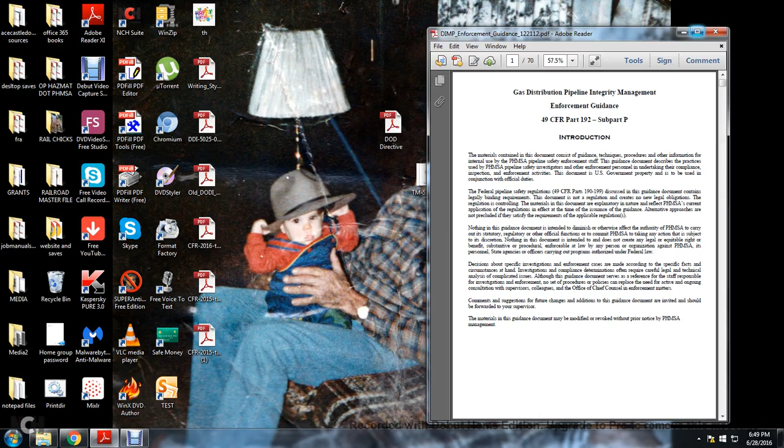Alright, hi. Continuing with our pipeline enforcement videos, I have the DIMP enforcement guidelines, the Gas Distribution and Pipeline Integrity Management Enforcement Guide, Title 49 CFR Part 192, Subpart P.

Introduction. The materials contained within this document consist of guidance, techniques, procedures, and other information for internal use of the Pipeline Hazardous Material Safety Administration pipeline safety enforcement staff. The guideline documentation describes practices used by Pipeline Hazardous Material Safety Administration pipeline safety investigators and other enforcement personnel undertaken with compliance, inspection, and enforcement activities.

This document is U.S. government property and is to be used in conjunction with the official duties of the Federal Pipeline Safety Regulations. See Title 49 CFR Part 190 through 199; this guidance documentation does not contain legally binding requirements. The document is not a regulation and creates no legal obligations. The regulation is controlling. The material in the document is explanatory in nature and reflects the Pipeline Hazardous Material Safety Administration's current application of regulations in effect at the time of issuance of the guidance.

Alternative approaches are not precluded by safety requirements of applicable regulation. Nothing in the guidance of this document is intended to diminish or otherwise affect the authority of the Pipeline Hazardous Material Safety Administration to carry out its statutory, regulatory, or other official functions, or to commit the Pipeline Hazardous Material Safety Administration to taking any action that subjects its discretion.

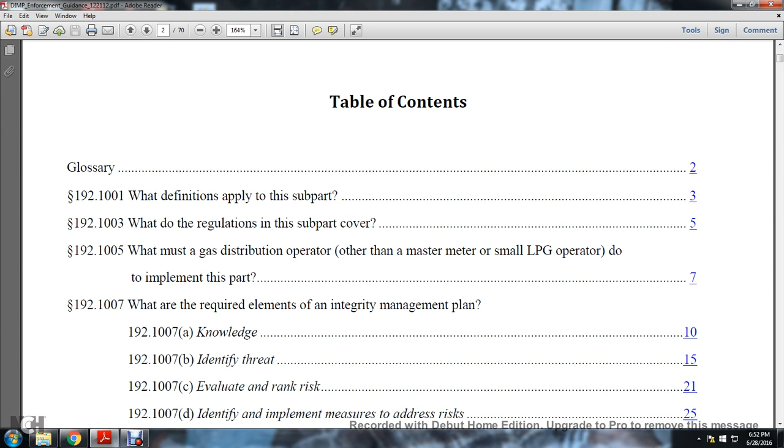Table of Contents: 192.1001, what are the definitions? Subpart 192.1003, what is the regulation? Subcovered. What is 192.1005? What must a gas distribution operator, other than a master meter or small LPG operator, do to implement the part?

What is 192.1007? What are the required elements of the integrity management plan? A, knowledge. B, identify threats. C, evaluate and rank risk. D, identify and implement measures to address risk. E, measure performance, monitor results, and evaluate effectiveness. F, periodic evaluation and improvement. G, report results.

192.1009, 191.12. What must an operator report when a mechanical fitting fails? What is 192.1011? What records must an operator keep? 192.1013. When may an operator deviate from required periodic inspections under this part?

192.1015, what must a master meter or small liquefied petroleum gas (LPG) operator do to implement the subpart? A, general. 192.1015B, what are the required elements of the integrity management plan? Knowledge, identifying and ranking risk, identifying and implementing measures to mitigate risk, measuring performance, monitoring results, evaluating effectiveness, periodic evaluation and improvement. 192.1015C, what are the required elements of the integrity management plan? C, records.

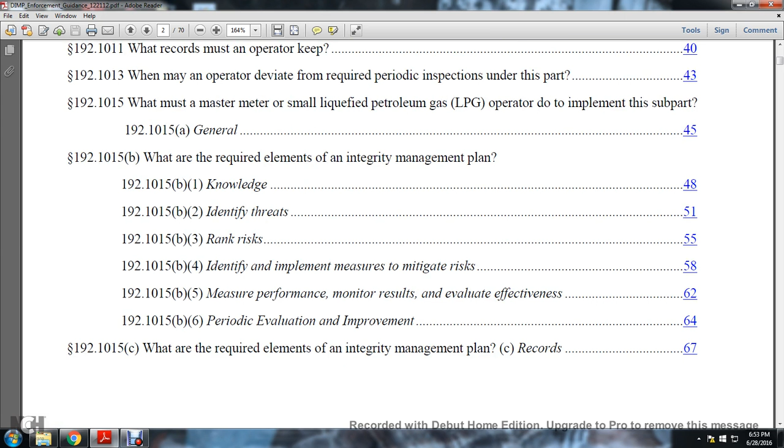Alright, for the complete glossary of terms, please refer to the following link: phmsa.gov/static files/phmsa/pipeline/tq glossary HTML.

Alright, enforcement guidance, distribution integrity management, Part 192, revision date December 21st, 2012. Distribution integrity management, Part 192, December 21st, 2012. Code section 192.1001.

What definitions apply to the subpart? The existing code's language: the following definitions apply to the subpart.

Excavation damage: any of the impact or results needed for the repair or replacement of underground facilities due to weakening, partial, or complete destruction of the facility, including but not limited to protective coating, lateral support, cathodic protection, and or housing of the line device facility.

Hazardous leaks. The following definitions apply. Hazardous leak means a leak representing an existing or probable hazard to person or property, and requires immediate repair or continuous action until the conditions are no longer hazardous.

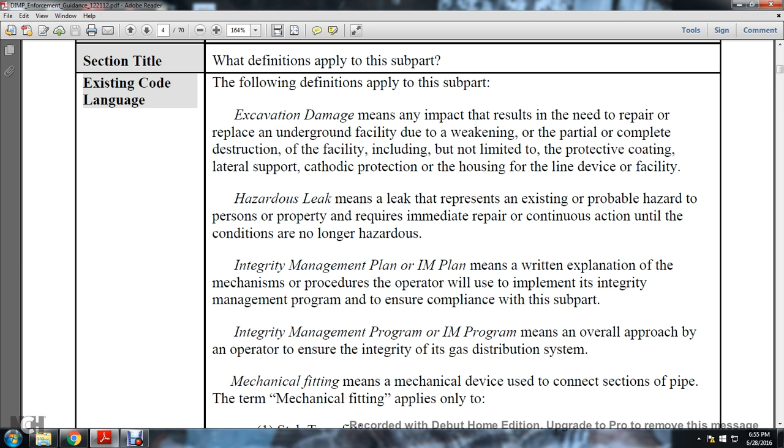The definition of integrity management plan, or the IM plan, means a written explanation of the mechanisms and procedures that the operator will use to implement the integrity management program to ensure compliance with the subpart. Also, integrity management program (IM program, instead of plan) means an overall approach by the operator to ensure the integrity of its gas distribution system.

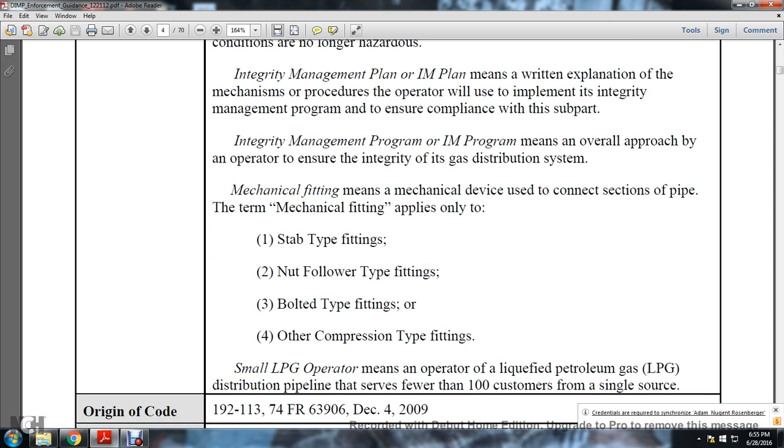The following definition of mechanical fitting means a mechanical device used to connect sections of pipe. This mechanical fitting definition applies only to stab-type fittings, nut follower-type fittings, bolted-type fittings, and other compression-type fittings.

A small LPG operator means an operator of a liquefied petroleum gas distribution pipeline that serves fewer than 100 customers from a single source.

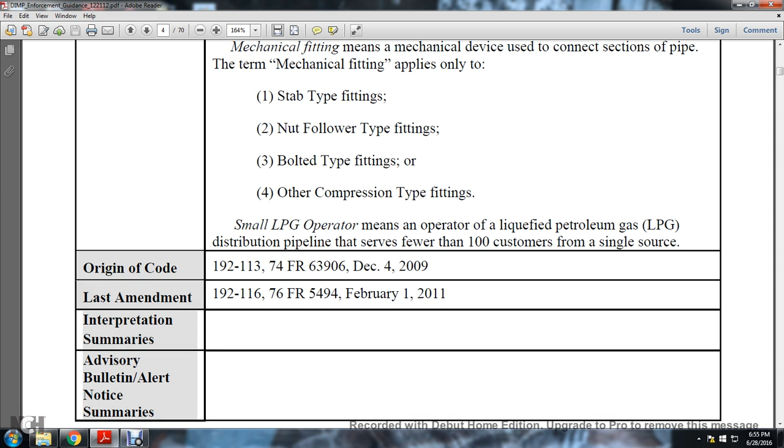The origin of the codes: 192-113, 74 Federal Register 63906, December 4th, 2009. The last amendment was 192-116, 76 FR 5494, February 1st, 2011.

Interpretation summaries, advisory bulletins, alert notice summaries without other materials and source, without guidance and information.

A line does not have the experience of a leak or release. The line does not have the experience of a leak or release to be considered to have been damage or excavation damage. An operator need not classify leaks as hazardous or non-hazardous provided with the leaks.

Repair of all leaks were found to qualify for the exclusion. An operator must treat all leaks as if they were hazardous, providing immediate repair and continuous action until the leak is repaired. Examples of a probable violation.

1. The operator does not have a comprehensive list of definitions. 2. The operator does not include the definitions in the distribution integrity management plan, or the DIMP plan, in other plans.

The operator's definitions are not consistent with Part 192. Examples of evidence include a copy of the written distribution integrity management plan or applicable portions that depict an omissions deficiency in the plan, and operator records. Other special notations: there were none.

Enforcement guidance, Distribution Integrity Management Plan, Part 192, revision date December 21st, 2012, code section 192.1003. What does the regulation subpart cover?

The existing code language: generally, the subpart prescribes minimum requirements for the integrity management program for any gas distribution pipeline covered under this part, including liquefied petroleum gas systems.

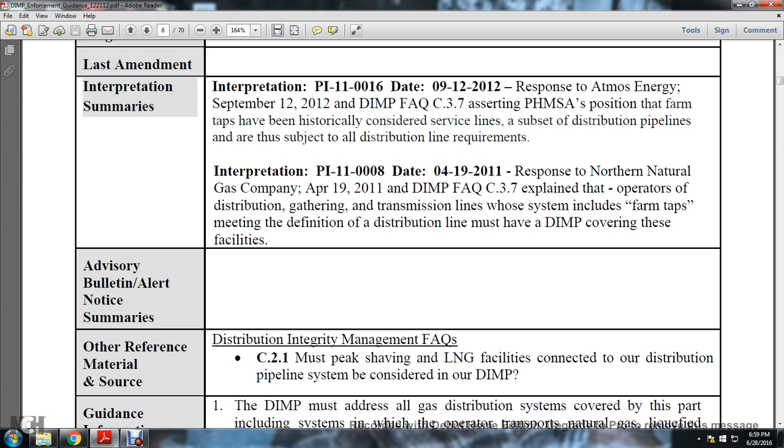FAQ C.3.7 explained that operators of distribution, gathering, or transmission lines whose system includes farm taps meeting the definition of distribution lines must have a distribution integrity management program covering these facilities.

The advisory bulletin and alert notice summaries are not available. Other reference material sources: Distribution Integrity Management FAQ.

C2.1: Must an LNG facility connected with the distribution pipeline be considered a part of the distribution integrity management program or plan?

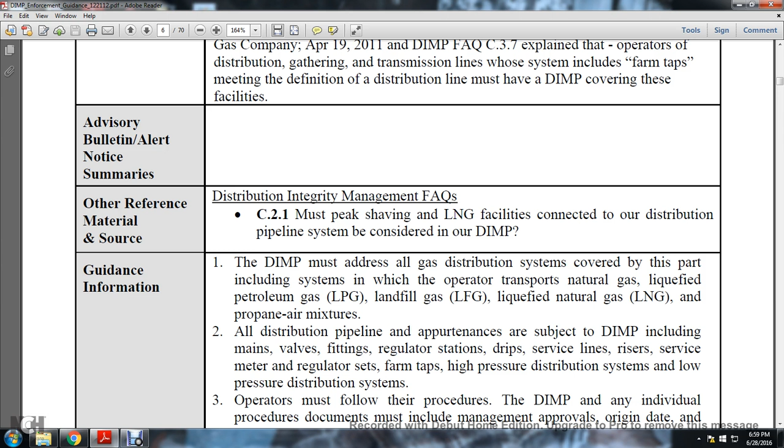The guidance states the distribution integrity program must address all distribution systems covered in this part, including systems in which the operator transports natural gas, liquefied petroleum gas, landfill gas, or liquefied natural gas. LPG is liquefied petroleum gas, LFG is landfill gas, LNG is liquefied natural gas, and also a propane-air mixture.

2. All distribution pipelines or facilities are subject to the distribution integrity management program, including main valves, fittings, regulator stations, drips, service lines, risers, services, meters, regulator sets, farm taps, high-pressure distribution systems, and low-pressure distribution systems.

3. The operator must follow the procedures of the Distribution Integrity Management Program. Any individual procedure document must include management approval, origin date, and effective date of the last revision. For additional information, see the guidance of Sections 192-1005.

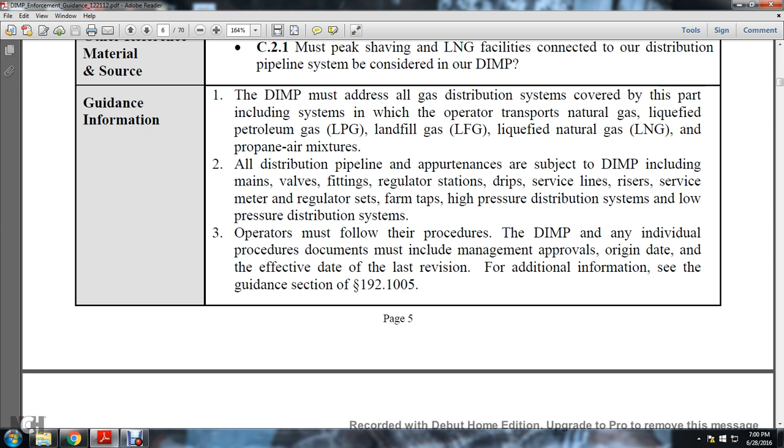4. Master meter and small liquefied petroleum gas operators are treated differently in the Distribution Integrity Management Program rule. For larger operators, as well as master meter and small liquefied petroleum gas operators, the integrity management program must include an appropriate set of mechanisms and procedures developed to implement each program element.

The operator may employ a written explanation of the process or mechanism used to develop and implement a required element in lieu of a specific written procedure. The integrity management program for these pipelines should reflect the specifics of the types of pipeline. The distribution integrity management program could be concise but sufficient for operator personnel to understand and implement the program on a consistent basis.

Examples of probable violation: the operator's distribution integrity management does not include all operator distribution pipeline facilities. The operator does not address liquefied petroleum gas or other types of transported material when applicable.

The necessary regulated pipeline systems are not covered by the Distribution Integrity Management Program. The Distribution Integrity Management Program does not include all pipeline facilities. An example of evidence is a copy of the written Distribution Integrity Management Program application showing the omission or deficiency in the Distribution Integrity Management Program, including copies of applicable pages showing the operator has not clearly stated otherwise.

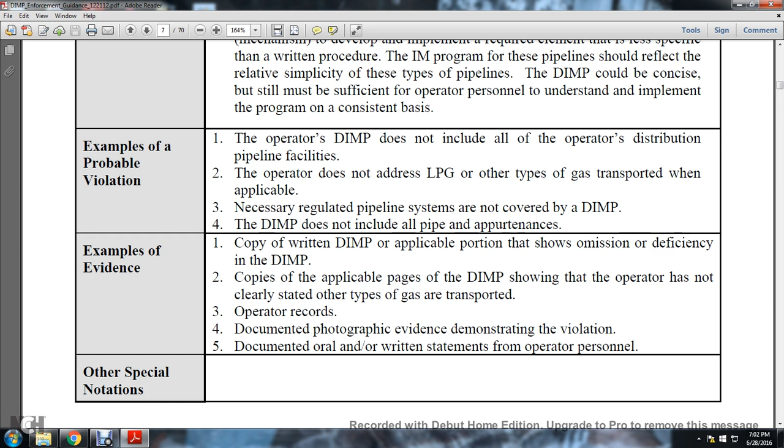Types of gas are transported. Operator records, documented photographic evidence demonstrating the violation, documentation, and oral or written statements of the operator personnel. Other special notations are not foreseen. Enforcement guidelines continuing.

Last amended: not foreseen. Interpretation summaries: not foreseen. Advisory bulletins and alerts: not foreseen. Other reference materials addressing the Distribution Integrity Management Program include the final rule preamble in the Federal Register Volume 74, Number 232, Friday December 4th, 2009, the rules and regulations, the comment topic 4, implementation time on page 63909, and comment topic 11 on required documentation, page 63915, Distribution Integrity Management Program, Pipeline and Hazardous Materials Safety Administration frequently asked questions.

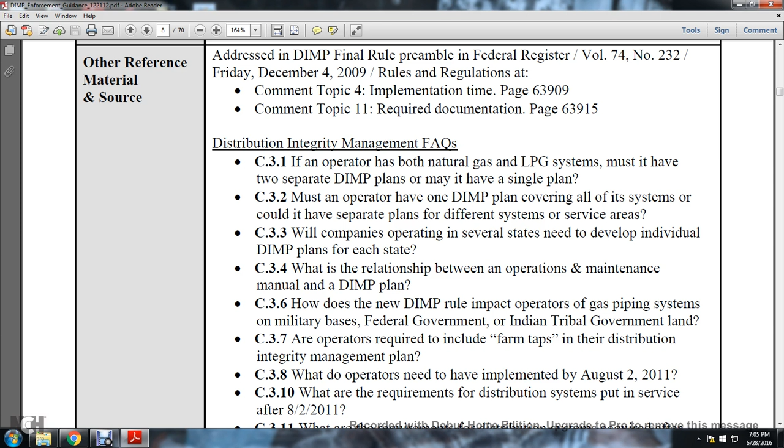C38: What do operators need to implement by August 2nd, 2011? C310: What are the other requirements of the distribution system put in service after August 2nd, 2011? C311: What are the requirements of the distribution system required by December 2nd, 2011?

explanation of mechanisms and procedures that the operator will use to implement the Integrity Management Program to ensure compliance with the subpart. An operator must have a written Distribution Integrity Management Program, Distribution Integrity Management Plan, the DIMP, containing and referencing procedures for development and implementation, each required in an element under statute 192-1007.

The procedure must have adequate detail to clearly describe the manner in which each requirement will be met. The procedure must be documented so the inspector can make a reasonable determination as to the accuracy and thoroughness of the procedure. The procedure needs to be provided with a description of who, what, when, where, why, and how the operator will perform the elements of the distribution integrity management plan, and can be concise yet sufficient for the operator personnel to understand and implement the program on a consistent basis.

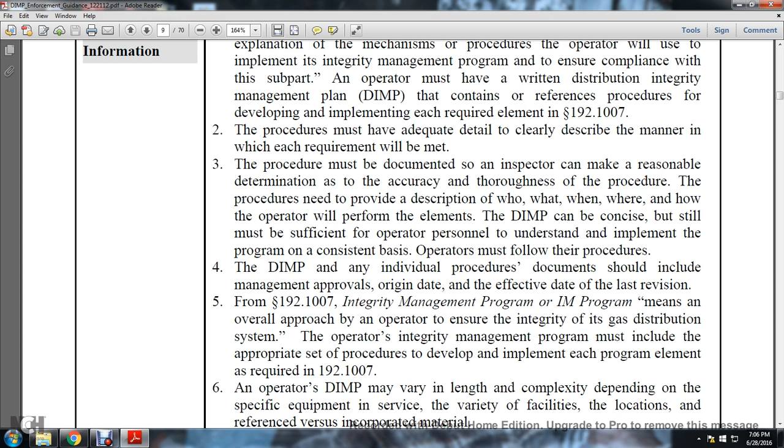Operators must follow this procedure. The distribution integrity management program and individual procedure documents should include management approvals, origin date, and the effective date of the last revision.

From 192-1007, the Integrity Management Program or IM Program means an overall approach by the operator to ensure the integrity of the gas distribution system. The operator's integrity management program must include the appropriate set of procedures developed for the implementation of each program element as required in statute 192-1007. An operator's distribution integrity management plan may vary in length and complexity depending on the specific equipment in service, variety of facilities, location, referenced versus incorporated material.

The structure of the Distribution Integrity Management Program is not prescribed; it may consist of a single comprehensive Distribution Integrity Management Program, multiple cross-referenced volumes, and reference documents. The Distribution Integrity Management Plan can be made available to personnel in hard copy. Computer-based documents must be accessible at the location where required Distribution Integrity Management Program activities are conducted. The operator must provide a means to access the procedures in the event of computer failure.

Purchased or off-the-shelf plans: Procedures must be fully customized by the operator to cover the specific, consistent operating requirements. The procedure must have adequate detail to clearly describe the manner in which each requirement will be met.

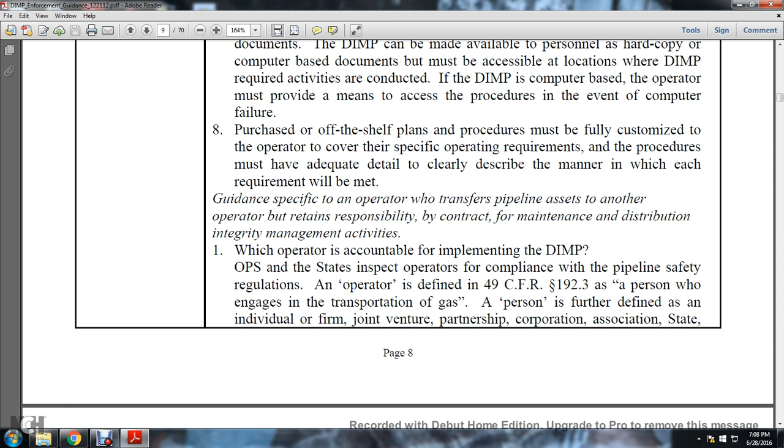Guidance specific to the operator covers transferring pipeline assets to another operator, but the original operator retains responsibility, by contract, for maintenance, distribution, and integrity management activities.

Which operator is accountable for implementing the Distribution Integrity Management Plan? The operator's compliance with pipeline safety is overseen by state inspectors. The operator is defined in Title 49 CFR 192.3 as a person who engages in the transportation of gas.

A person is further defined as an individual, firm, joint venture, partnership, corporation, association, state, municipality, cooperative association, joint stock association, including any trustee, receiver, assignee, or personal representative thereof, and any operator retaining responsibility for operation and maintenance, including distribution integrity management program activities.

The operator is responsible for complying with the pipeline safety regulations.

Examples of probable violations: the operator does not have the distribution integrity management program written and implemented by August 2nd, 2011; the program does not contain the necessary procedures to demonstrate it was written and implemented; a new system was put into operation service without a written distribution integrity management program.

Another probable violation is an operator who acquired an existing system and did not continue operation under the existing distribution integrity management program, failing to incorporate the acquired assets into that program.

Examples of evidence are copies of the applicable pages of the Distribution Integrity Management Program showing the operator has not clearly stated that the program was written and implemented by August 2nd, 2011, along with documented oral or written statements from operator personnel.

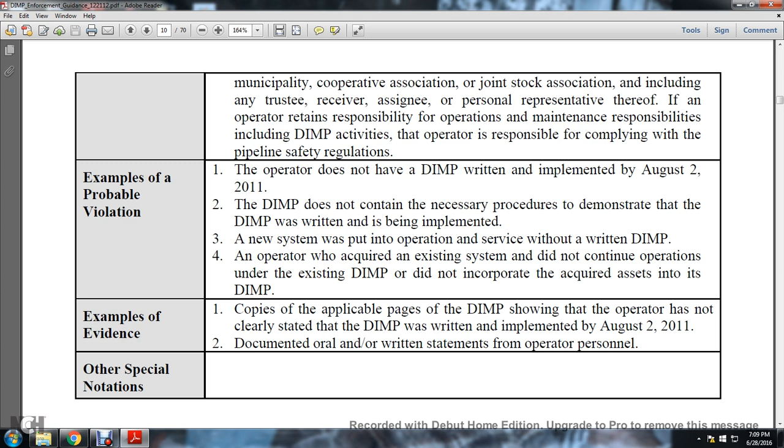Other special notations are not foreseeable.

Enforcement guidance: Distribution Integrity Management, December 21st, 2012, revision date, code section 192.1007(a), under the section titled 'What are the required elements of an integrity management plan?'

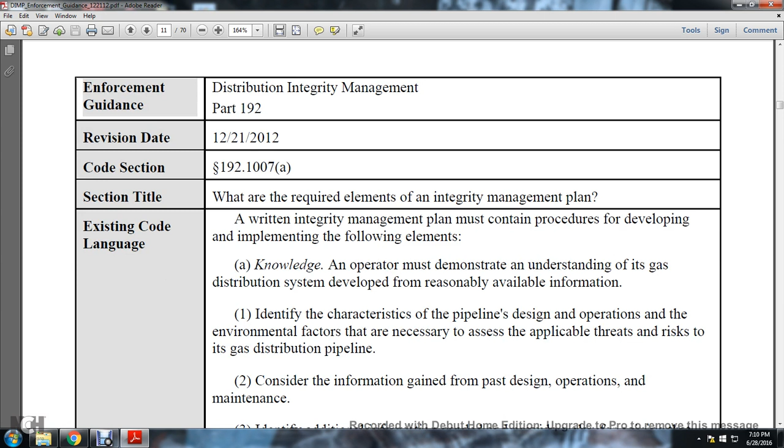What are the required elements of the integrity management plan? The existing code requires a written integrity management plan containing procedures for developing and implementing the following elements: knowledge. The operator must demonstrate understanding of the gas distribution system, developed from reasonably available information, identifying the characteristics of pipeline design, operation, and environmental factors necessary to assess applicable threats and risks.

Considering information gained in the past regarding design, operation, and maintenance, identifying additional information needed for the plan, and gaining information over time from normal activities conducted on the pipeline, such as design, construction, operation, and maintenance activities. The process for developing and implementing the integrity management program will be periodically reviewed, refined, and improved as needed.

Provide for the capture, retention, and use of data on any new pipeline installed. The data must include, at a minimum, the location where the new pipeline is installed and the material from which it was constructed.

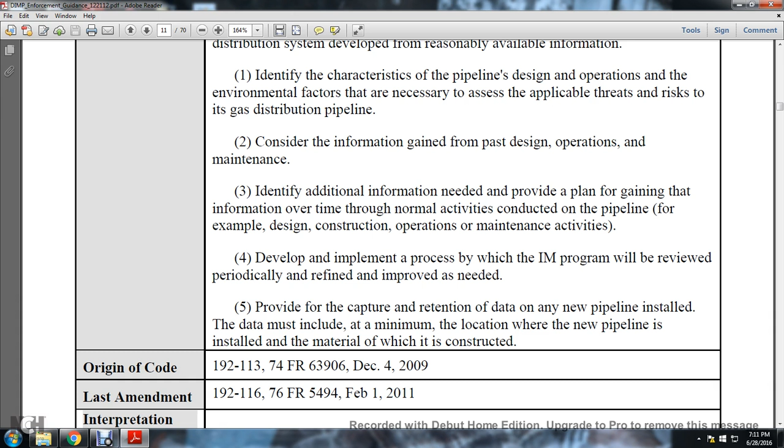The origin of the code is 192-113, 74 FR 63906, December 4th, 2009, last amended at 192-116, 76 FR 5494, February 1st, 2011.

Interpretation summaries are not foreseeable advisory bulletins, alerts, notices, and summaries. Advisory Bulletin ADB-12-06, issued on May 7, 2012, by the Pipeline and Hazardous Materials Safety Administration, reminds operators of gas and hazardous liquid pipeline facilities to verify records.

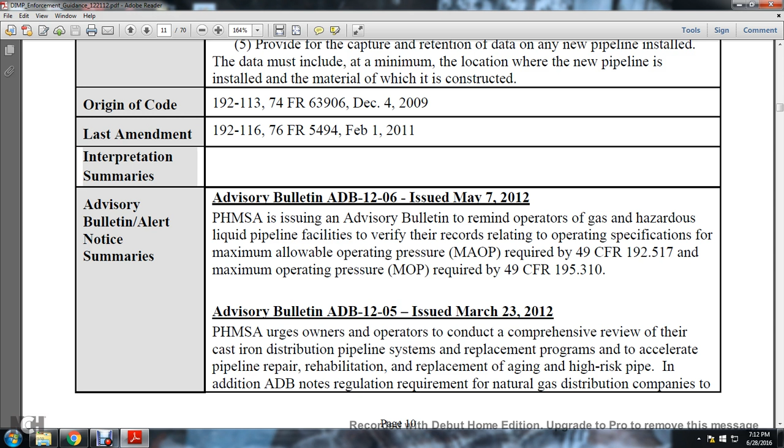Records relating to operating specifications for maximum allowable operating pressure, or MAOP, are required by Title 49 CFR 192.517, maximum operating pressure MOP, and required by Title 49 CFR 195.310, per Advisory Bulletin ADB-12-05, issued on March 23, 2012.

The Pipeline and Hazardous Materials Safety Administration urges owners and operators to conduct comprehensive reviews of their cast iron distribution pipeline system replacement programs and to accelerate the rehabilitation and replacement of aging, high-risk pipe.

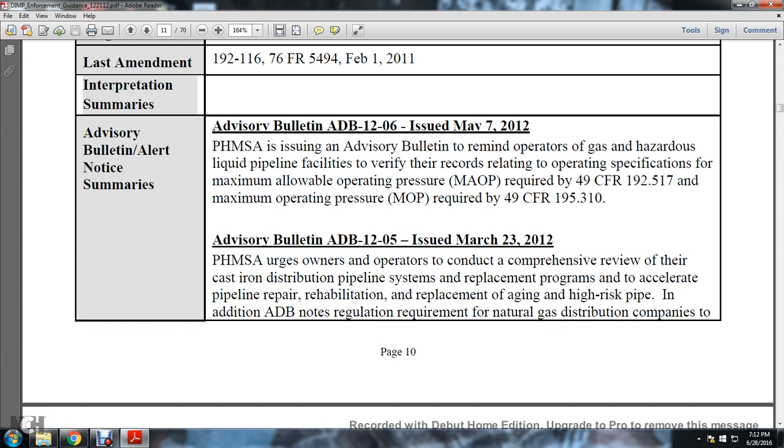In addition, the advisory bulletin notes the regulatory requirement for natural gas distribution companies to develop a distribution integrity management plan for the pipelines they own, operate, and maintain.

Advisory Bulletin 1101, issued January 10th, 2011, Pipeline and Hazardous Materials Safety Administration 2010-0381, Pipeline Safety, addresses establishing maximum allowable operating pressure and maximum operating pressure under the record of evidence, integrity management, risk identification, assessment, prevention, and mitigation.

Advisory Bulletin ADB-09-02, issued September 30th, 2009, addresses a potential issue with weldable compression coupling installation.

Other material resources address the distribution integrity management program or plan, including the final rule preamble, Federal Register 74, number 232, December 4th, 2009, rules and regulations, comment topic 20, knowledge of the pipeline environmental factors, page 63919.

Distribution integrity management frequently asked questions, C.4.2: Can the distribution integrity plan incorporate by reference the operator's procedures from other manuals and plans? C4A.

C4A2: There are some characteristics about the operator's system that may not be known during the development of the integrity management plan, with the Pipeline and Hazardous Materials Safety Administration having expectations for filling those voids.

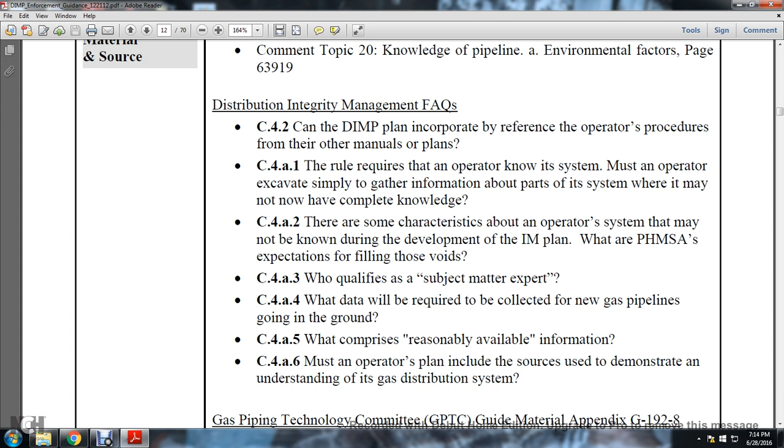C4A3: who qualifies as a subject matter expert. C4A4: what data will be required to be collected for new gas line pipelines going into the ground. C4A5: what comprises reasonably available information.

Must an operator's plan include the sources used to demonstrate understanding of the gas distribution system. The Gas Piping Technology Committee GPTC Guide Material Appendix G192.8, in the section on knowledge of the system, provides a useful list of records for information gathered, in addition to the Distribution Integrity Management Program Appendix. The GPTC Guide Material Appendix G192.17 contains a list of explicit requirements for reports, inspections, tests, written procedural records, and similar actions.

The guidance information: 1. The operator must have a written distribution integrity management plan that contains procedures for developing and implementing each of the requirements of Section 192.1007. The procedure must have adequate detail clearly describing the manner in which each requirement will be met.

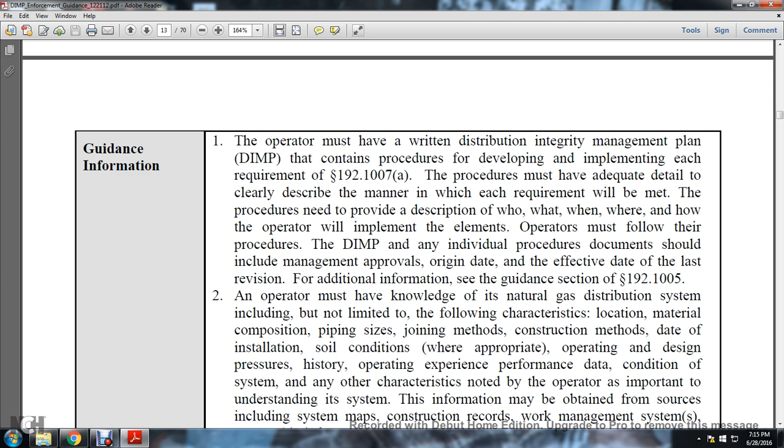The procedure needs to describe who, what, when, where, and how the operator will implement the elements. The operator must follow the procedures of the Distribution Integrity Management Plan, and individual documented procedures should include management approvals, origin date, and effective date of the last revision, for additional guidance under Section 192.1005.

2. An operator must have knowledge of the natural gas distribution system, including but not limited to the following characteristics: location, material composition, piping sizes, joint methods, construction method, date of installation, soil conditions when appropriate, operating and design pressure, history, operating experience, performance data, and condition of the system. Any other characteristics identified by the operator as important to understanding the system.

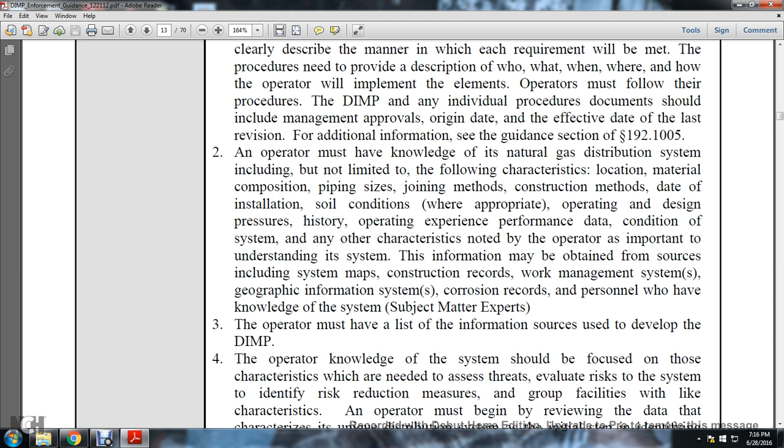Information may be obtained from sources including system maps and construction records, work management systems, geographic information, corrosion records, and personnel who have knowledge of the system, such as subject matter experts. The operator must have a list of the information sources used to develop the Distribution Integrity Management Program.

The operator's knowledge of the system should focus on the characteristics needed to assess the threats, evaluate the risk of the system, identify reduction measures, and group facilities with likely similar characteristics.

An operator must begin by reviewing the data to characterize the unique distribution system as the initial step in identifying, assessing, and prioritizing threats. Characteristics evaluated by the operator must allow the operator to identify facilities with known potential problems.

For example, operators should examine the design characteristics, such as the joining method, to determine if their system contains mechanically joined pipe that can be a threat to the integrity of the system.

5. Operators transporting gas other than natural gas need to describe in the Distribution Integrity Management Program how the characteristics of that gas impact the threats and risks, including the differences from natural gas.

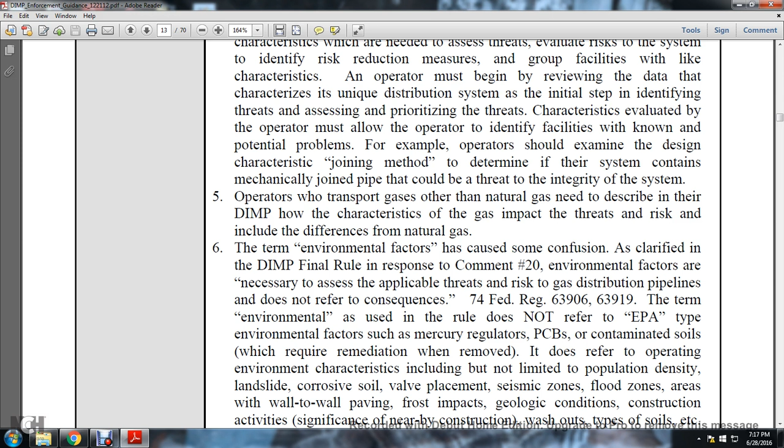The term 'environmental factors' has caused some confusion. To clarify, the Distribution Integrity Management Program final rule, in response to comment number 20, states that environmental factors are necessary to assess the applicable threats and risks of the gas distribution pipeline. It does not refer to consequences.

74 Federal Register 63906 and 63919: the term 'environmental' is used. The rule does not refer to Environmental Protection Agency type environmental factors, such as mercury regulators or PCBs or contaminated soils, which require remediation when removed.

It refers instead to operating environmental characteristics, including but not limited to population density, landslide areas, corrosive soil, valve placement, seismic zones, flood zone areas, wall-to-wall paving, frost impacts, geological conditions, construction activity near the pipeline, and washout-prone soils, etc.

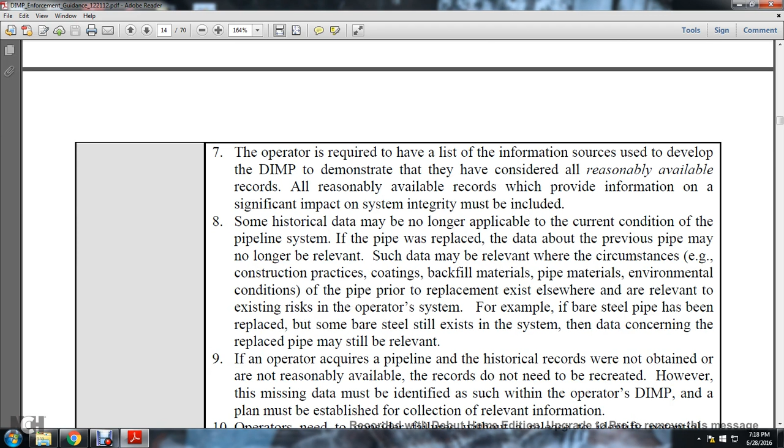7. The operator is required to have a list of information sources used to develop the Distribution Integrity Management Program, to demonstrate that they have considered all reasonably available records. All reasonably available records which provide information with significant impact on system integrity must be included.

8. Some historical data may no longer be applicable to the current condition of the pipeline system. If the pipe was replaced, the data from the previous pipe may no longer be relevant.

Such data may be relevant to the circumstances, construction practices, coating, backfill materials, pipe materials, and environmental conditions of the pipe prior to replacement existing elsewhere, relevant to the existing risk in the operator's system. For example, if bare steel pipe has been replaced but some bare steel still exists in the system, the data concerning the replaced pipe may still be relevant.

If the operator acquires the pipeline, historical records were not obtained or are not reasonably available, the records do not need to be recreated. However, the missing data must be identified within the operator's distribution integrity management plan, and a plan must be established for the collection of the relevant information.

Operators need to consider failures without release in identifying the potential threat, the type of information considered reasonably available. For example, the operator may evaluate whether pressure regulators froze off, and what upset conditions in the system could have occurred.

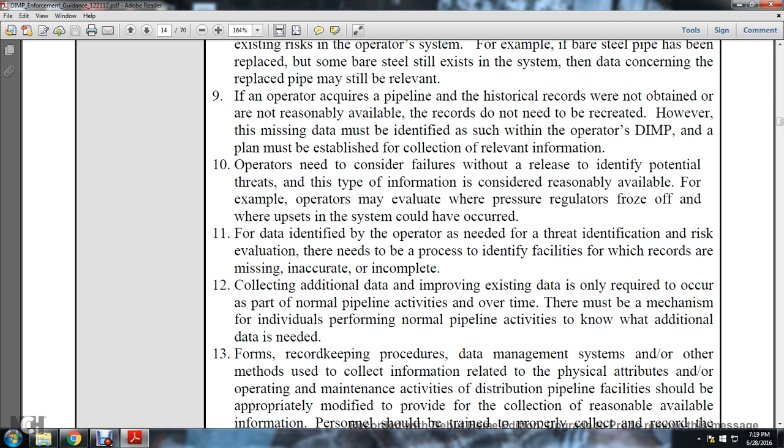For the data identified by the operator as needed for threat identification and risk evaluation, there needs to be a process to identify facilities for which the records are missing, inaccurate, or incomplete.

The collection of additional data improving the existing data is only required to occur as normal pipeline activities happen over time. There must be a mechanism for the individual performing normal pipeline activities to know where the additional data is needed.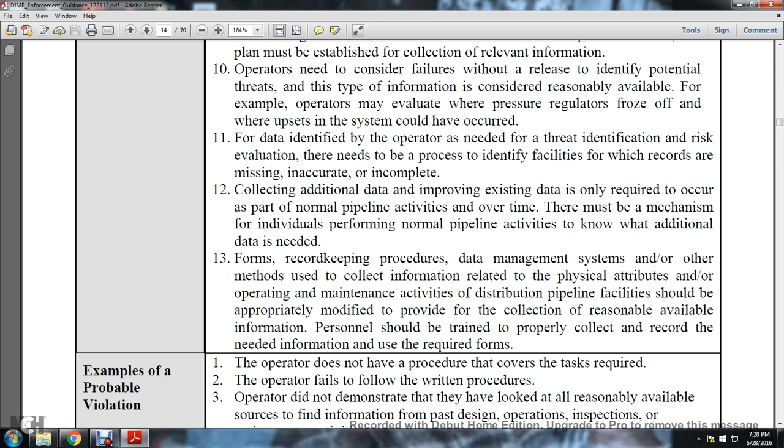Forms and record-keeping, procedural data management, and other methods of collecting information related to the physical attributes and operating or maintenance activity of distribution pipeline facilities should be appropriately modified to provide for the collection of reasonably available information. Personnel should be trained to properly collect and record the needed information using the required forms.

Example of probable violation: the operator. 1. The operator does not have a procedure that covers the task required. 2. The operator fails to follow the written procedure.

3. The operator did not demonstrate that they have looked at all reasonably available sources to find information for past design, operation, inspection, and maintenance activities. 4. The operator did not specify the list of documents used to assemble the knowledge of its system.

Examples of probable violations: 7. The distribution integrity management plan did not identify the records containing the appropriate environmental characteristics to assess each threat category and subcategory of the operator's pipeline.

8. There is no procedure for identifying needed missing, inaccurate, and incomplete data. 9. The operator has not identified the missing, inaccurate, or incomplete data. 10. The operator has identified missing, inaccurate, or incomplete data, but does not have a procedural plan to collect the missing data information over time. 11. The operator failed to retain the data of the new pipeline installed.

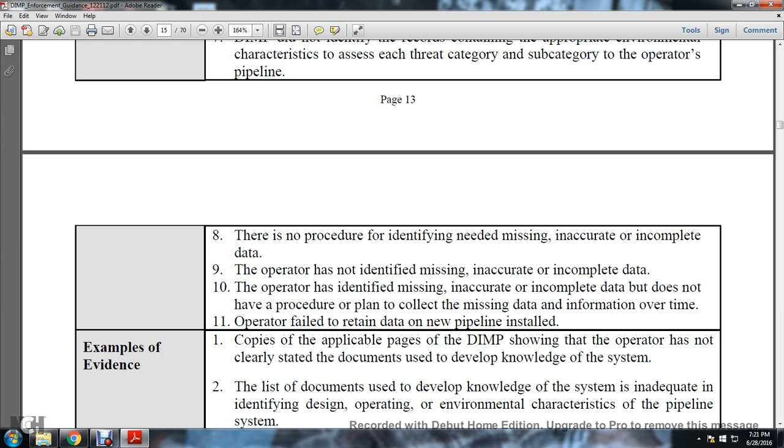Examples of evidence are copies of the applicable pages of the Distribution Integrity Management Program showing the operator has not clearly stated the documents used to develop the knowledge of the system. 2. The list of documents used to develop the knowledge of the system is inadequate in identifying the design, operation, and environmental characteristics of the pipeline system.

3. Copies of applicable pages of the Distribution Integrity Management Program show that the program is not detailed enough for the inspector to make a reasonable determination as to the accuracy and thoroughness of the process. 4. Documented photographic evidence demonstrating the violation, documented or written statements from operator personnel. Other specifications not applicable at this moment.

Alright, enforcement data, distribution integrity management, part 192, December 21st, 2012, 192.1007B, with section title: what are the required elements for the integrity management plan?

The existing code language: a written integrity management program must contain procedures for developing and implementing of the following elements. B. Identifying the threats.

The operator must consider the following categories of threats to gas distribution pipeline: corrosion, natural forces, excavation damage, other outside forces, material or welds, equipment failure, incorrect operation, and other concerns that could threaten the integrity of the pipeline.

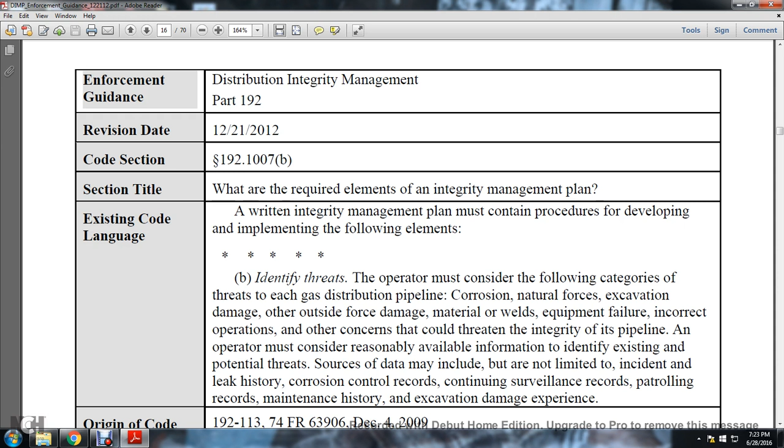An operator must consider reasonably available information to identify existing and potential threats. Such data may include, but is not limited to, incident and leak history, corrosion control records, continuing surveillance and patrolling records, maintenance history, and excavation damage experience.

Origin of code 192-113, Federal Register 63906, December 4th 2009. Last amendment 192-116, Federal Register 5494, February 1st 2011. Interpretation summaries are not foreseen at this time.

Advisory bulletin, alert, and notice summaries. Advisory bulletin 1205, issued March 23rd 2012.

The Pipeline and Hazardous Materials Safety Administration urges owner-operators to conduct a comprehensive review of the cast iron distribution pipeline system replacement program to accelerate the repair, rehabilitation, and replacement of aging, high-risk pipe. In addition, the advisory bulletin notes the regulatory requirement for natural gas distribution companies to develop a distribution integrity management plan for the pipelines owned, operated, and maintained.

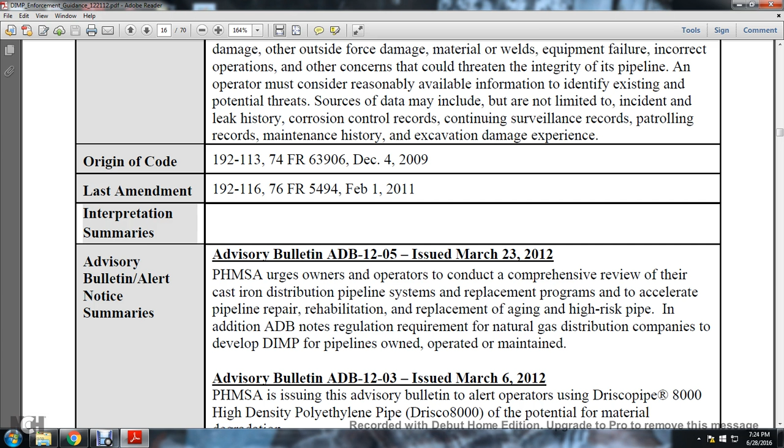Advisory Bulletin 1203, issued March 6, 2012, by the Pipeline and Hazardous Materials Safety Administration, alerted operators of Driscopipe 8000 high density polyethylene pipe to the potential for material degradation.

Advisory Bulletin 1105, issued August 2011, reminded owners and operators of gas and hazardous liquid pipelines of the potential for damage to pipeline facilities caused by the passage of hurricanes.

Advisory Bulletin 1104, issued March 20, 2012, addressed pipeline safety and potential damage to pipeline facilities caused by flooding.

Advisory Bulletin 1102, issued February 9, 2011, addressed pipeline safety: dangers of abnormal ice buildup on gas distribution systems.

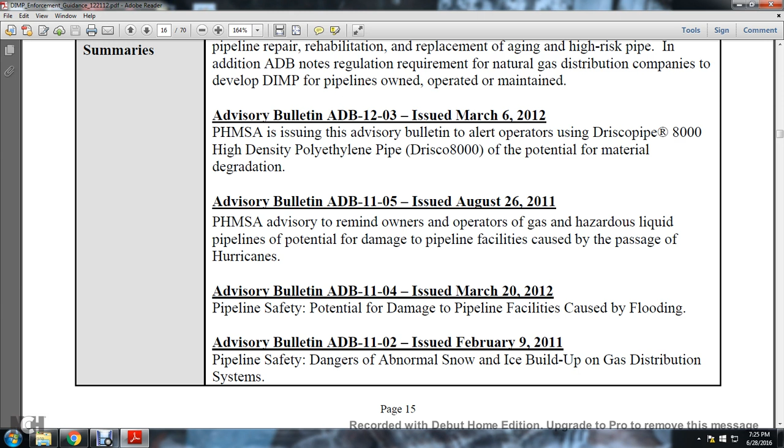Advisory Bulletin 1003, issued March 24, 2010, addressed pipeline safety issues related to girth weld quality due to improper transition, misalignment, and welding practices on larger diameter line pipe.

Advisory Bulletin 0902, issued September 30, 2009, addressed potential issues with weldable compression coupling installation.

Advisory Bulletin 0802, issued March 4, 2008, addressed issues related to mechanical couplings used in natural gas distribution systems.

Advisory Bulletin 0701, issued September 6, 2007, provided updated notification on the susceptibility to premature brittle-like cracking of older plastic pipe.

Advisory Bulletin 0603, issued November 22, 2006, gave notice for operators of natural gas and hazardous liquid pipelines to accurately locate and mark underground pipelines before construction related to excavation activities commences.

Advisory Bulletin 0505, issued August 10, 2005, addressed inspection and testing of pilot-operated pressure relief valves.

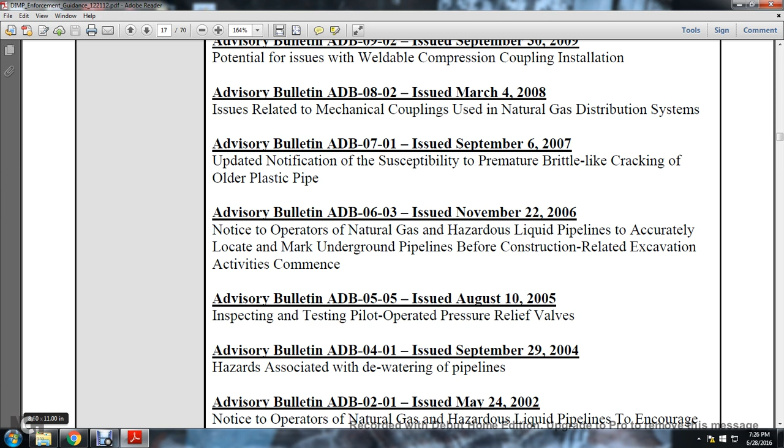Advisory Bulletin 0401, issued September 29, 2004, addressed hazards associated with dewatering of pipelines.

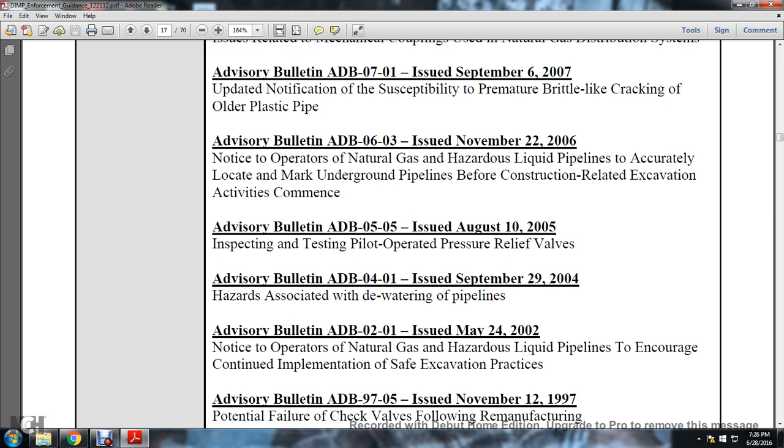Advisory Bulletin 0201, issued May 24, 2002, gave notice for operators of natural gas and hazardous liquid pipelines to encourage continued implementation of safe excavation practices.

Advisory Bulletin 9705, issued November 12, 1997, addressed potential failure of check valves following remanufacturing. Advisory Bulletin 9703, issued March 4, 1997, addressed potential soil subsidence at pipeline facilities.

Advisory Bulletin 9502, issued August 9, 1995, addressed increased pipeline transportation security measures.

Advisory Bulletin 9405, issued November 2, 1994, addressed pipelines affected by flooding. Alert Notice 9201, issued January 8, 1992, addressed lightning-induced electrical discharge from tracer wire to plastic pipe.

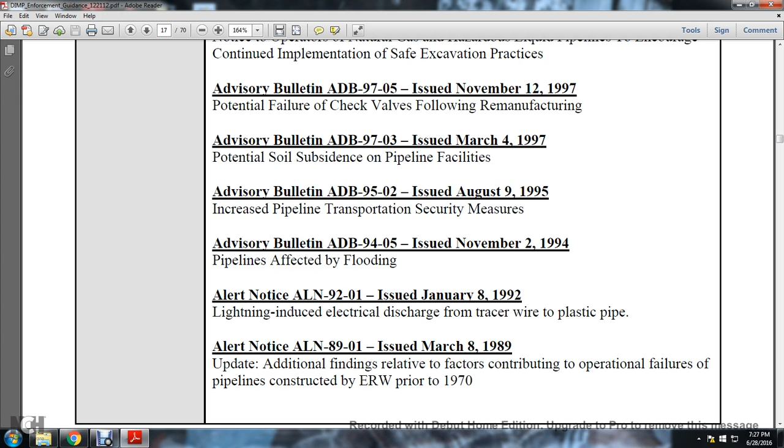Alert Notice 8901, issued March 8, 1989, updated findings of relative factors contributing to operational failures of pipeline constructed with ERW pipe prior to 1970.

Alert Notice 8701, issued March 13, 1987, addressed an incident involving fillet welding of a full encirclement repair sleeve on a 4-inch pipeline.

The pipeline was American Petroleum Institute 5LX 52 pipe, located in King of Prussia, Pennsylvania. The pipeline failure occurred October 7, 1986.

Alert Notice 8602, issued February 26, 1986, addressed plastic pipe mechanical coupling issues.

Other reference materials are addressed in the Distribution Integrity Management Program final rule, in the preamble to the Federal Register, Volume 74, Number 232, December 4, 2009, Rules and Regulations, under comment to Topic 21, Threat Identification, a source of information.

Page 63920, Distribution Integrity Management, frequently asked questions.

Question C4B1: must the operator use a computer-based risk analysis model? Question C4B2: must the eight threats be considered for every pipeline type?

Question C4B3: does the Distribution Integrity Management Program require including the condition of the facility and the risk of potential damage from external sources? Cross-bores of gas lines through sewers have been reported at 2 to 3 per mile in high-risk areas.

The predominant trenchless installation methods used for gas line installations, where gas lines and sewers are in proximity of each other, create the potential for cross-bores of sewers, so gas line intersections with sewers need to be determined.

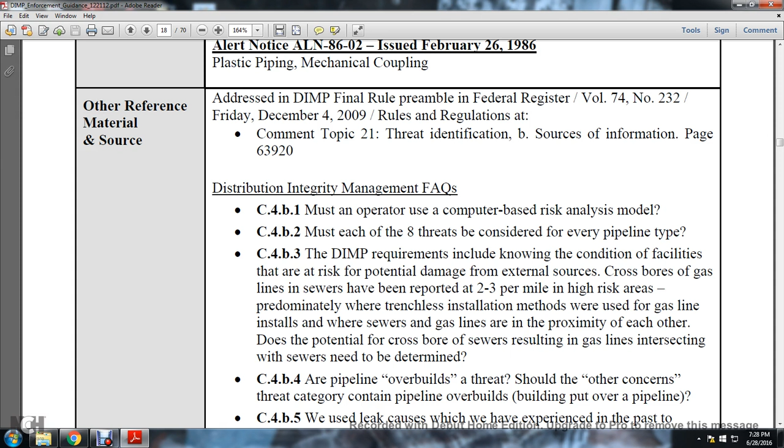Question C4B5: can we use leak causes which we have experienced in the past in identifying threats?

Question C4B6: since we have not experienced issues with pre-1973 Aldyl-A pipe in the past, we did not subdivide plastic pipe in the risk evaluation.

Is it a potential threat only because of other operators' experience? Should we have treated it as an applicable threat?

Question C4B7: must a historical leak be considered after the section of pipe has been replaced?

Question C4B8: we often replace a section of the pipeline rather than repairing the individual leak in that section. In this case, must we record the number and grade of the leaks?

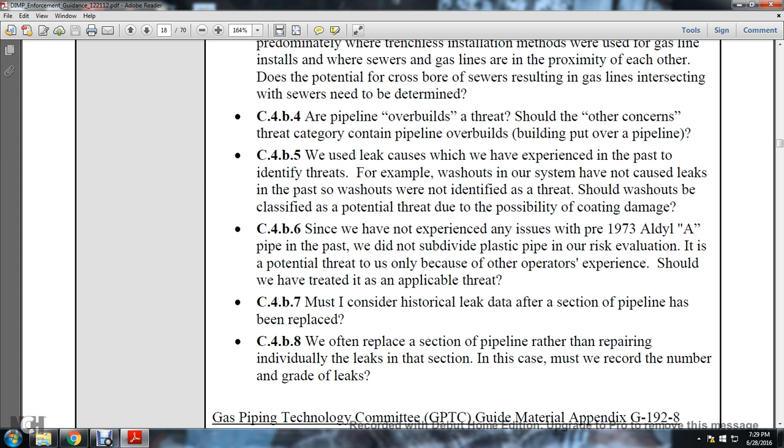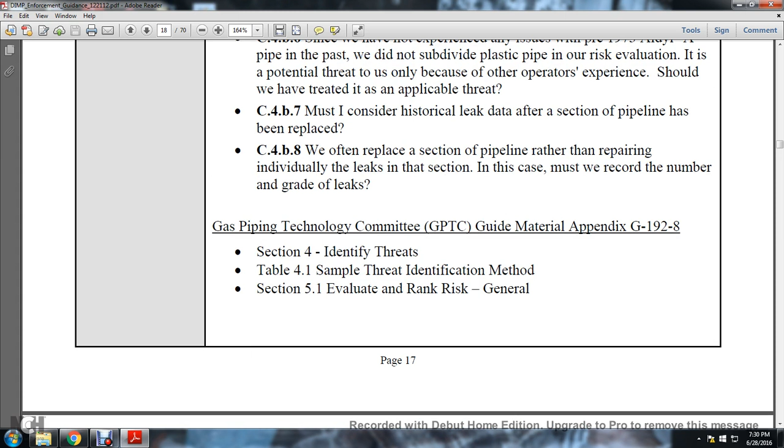The Gas Piping Technology Committee Guide Material, Appendix G, 192.8, Section 4, Identifying Threats, Table 4.1, Sample Threat Identification Methods, Section 5.1, Evaluating and Ranking Risk in General.

Guidance information: the operator must have written the distribution integrity management plan that contains the procedures for developing and implementing each of the requirements of 192.1007(b). The procedure must adequately detail and clearly describe the manner that each requirement will be met.

The procedures need to provide a description of who, what, when, where, and how the operator implemented the elements. The operator must follow the procedures of the distribution integrity management program, and an individual procedure document should include management approval of origin, date, and effective date of last revision. For additional information, see the guidance in section 192.1005.

The threat identification process must establish realistic information on the threats, with determination of whether their frequency or level of significance requires action beyond normal operating practices, and understanding the threats and risks specific to any of the operator's systems by analyzing information in the company's operating, maintenance, and inspection records, including but not limited to specific surveys, patrolling records, corrosion control records, and leak and incident data.

Even if the operator concludes that a particular threat is not applicable to a section of the pipeline, the basis for drawing such a conclusion must be documented.

The operator may not discount or eliminate any existing or potential threat or subsystem without an adequate basis for doing so. The basis must consider the pipeline failure history, design, manufacture, construction, operation, and maintenance. Unavailable information is not justification for exclusion of a threat; where data is missing or insufficient, conservative assumptions may be used in the risk assessment.

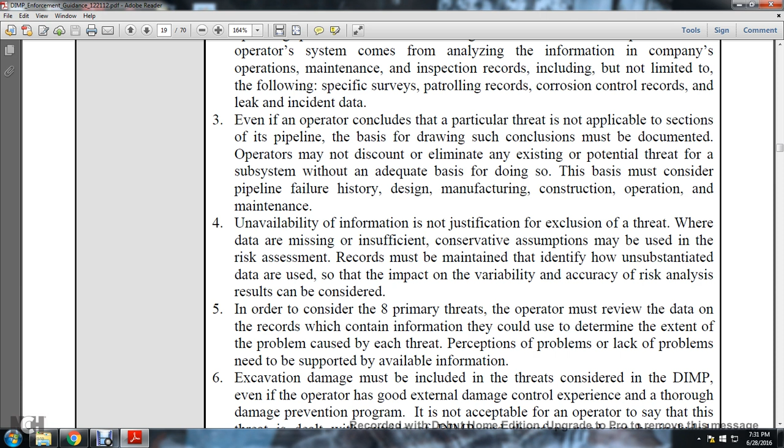In order to consider the 8 primary threats, the operator must review data and records containing information that could be used to determine the extent of the problem related to each threat. Perception of the problem, or lack thereof, needs to be supported by available information.

Sixth, excavation damage must be included among the threats considered in the distribution integrity management program. Even if the operator has good external damage control experience and a thorough damage prevention program, it is not acceptable for the operator to say that this threat is dealt with outside of the distribution integrity management program. It must be included. Excavation damage is always a potential threat, regardless of whether the specific subsystem has experienced damage.

Potential threats include situations where the operator has not necessarily experienced leaks or releases of gas due to conditions conducive to atmospheric corrosion, hurricanes, flooding, excavation damage, or materials with known integrity issues.

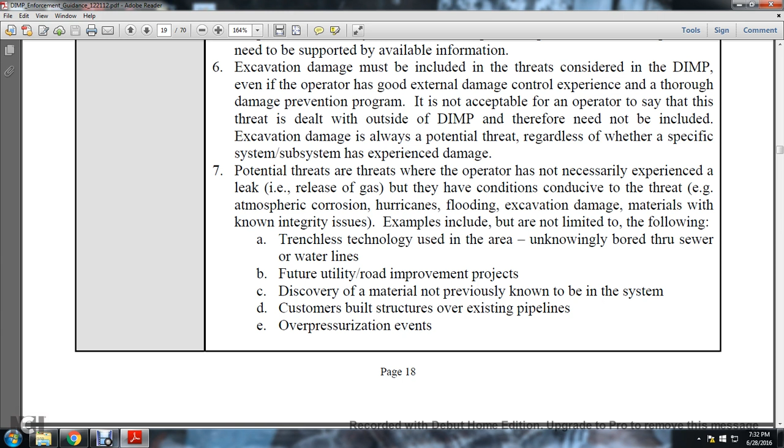Examples include but are not limited to: trenchless technology used in an area that unknowingly bored through sewer or water lines; future utility or road improvement projects that discover material not previously known to be part of the system; and customer-built structures over the existing pipeline.

Overpressurization events, instances of pipe damage including damage to the tracer wire that did not result in release, and pipe material susceptible to brittle failure modes.

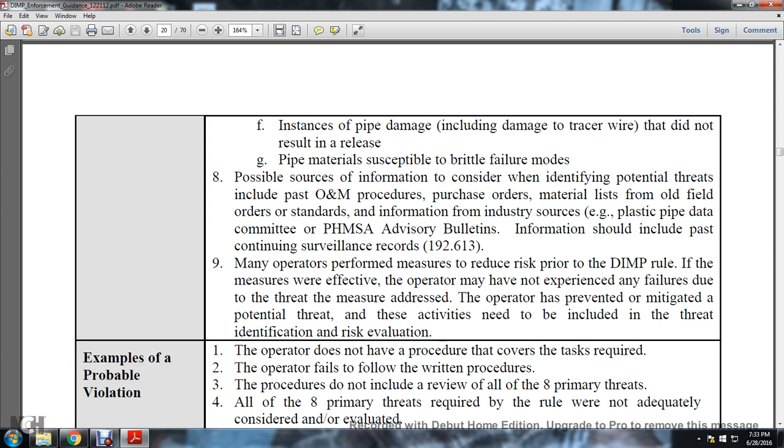Many operators perform measures to reduce risk prior to the distribution integrity management rule. If the measures were effective, the operator may not have experienced failures due to the threat the measure addressed. The operator has mitigated the potential threat, and these mitigation activities need to be included in the threat identification and risk evaluation.

Examples of probable violations: the operator does not have a procedure to cover the required task; the operator fails to follow the written procedures; the procedures do not include review of all 8 primary threats.

Fourth, all of the 8 primary threats required by the rule were not adequately addressed or evaluated. Fifth, the multiple threats from the 8 primary threat categories were not adequately evaluated to characterize the operating system. Sixth, specific threats were eliminated from consideration without adequate justification.

Seventh, the operator does not use relevant operating and maintenance records in evaluating each threat. Eighth, elimination of the threat is not sufficiently documented. Ninth, the procedures did not adequately describe the requirements for identifying and evaluating threats.

The operator of the distribution integrity management plan did not consider data from external sources identifying potential threats. The plan did not identify records containing the appropriate characteristics of pipeline design needed to assess each threat category and subcategory applicable to the operator's pipeline.

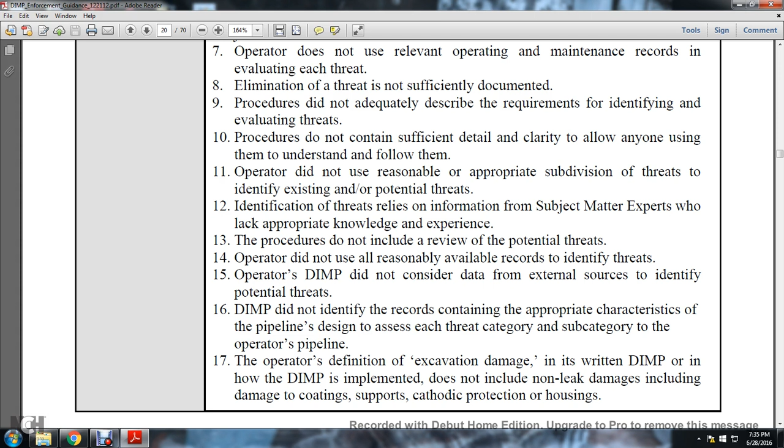The operator's definition of excavation damage, as written in the distribution integrity management program or in how the program is implemented, does not include non-leak damages, including damage to coating, supports, and cathodic protection or housing.

Examples of evidence include copies of applicable pages of the operator's Distribution Integrity Management Program which demonstrate inadequate procedures, and responsible available external information advisory bulletins defining threats applicable to the operating system that were not considered in developing the program. Also included are documented photographic evidence demonstrating the violation, documented oral or written statements from operating personnel, and other special notifications not foreseen.

Distribution Integrity Management, Part 192, December 21st 2012, 192.1007C. What are the required elements of an integrity management plan? A written integrity management plan must contain procedures for developing the implementation of the following elements.

Existing code language on evaluating the risk: the operator must evaluate the risk associated with the distribution pipeline. In evaluation, the operator must determine the relative importance of each threat and estimate and rank the risk posed by the pipeline.

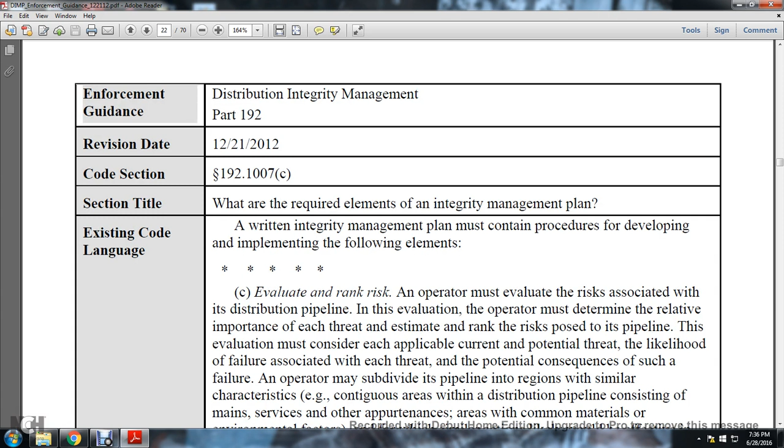Evaluation must consider each applicable current and potential threat and likelihood of failure associated with each threat, and potential consequences of failure. The operator may subdivide the pipeline into regions with similar characteristics, such as where the distribution pipeline consists of mains, services, and appurtenances of similar materials, environmental factors, and similar actions, which would be effective in reducing the risk.

The origin of the code: 192-113, 74 Federal Register 63906, December 4th 2009, and last amended 192-116, 76 Federal Register 5494, February 1st 2011. Interpretation summaries are not foreseen.

Advisory bulletin alert notices summary: Advisory Bulletin 1205, issued March 23rd 2012. The Pipeline and Hazardous Materials Safety Administration urges owners to conduct a comprehensive review of their cast iron distribution pipeline system, put in place a program to accelerate pipeline rehabilitation, replace aging and high-risk pipe, and also gives notice of regulation requirements for natural gas distribution companies under the Distribution Integrity Management Program.

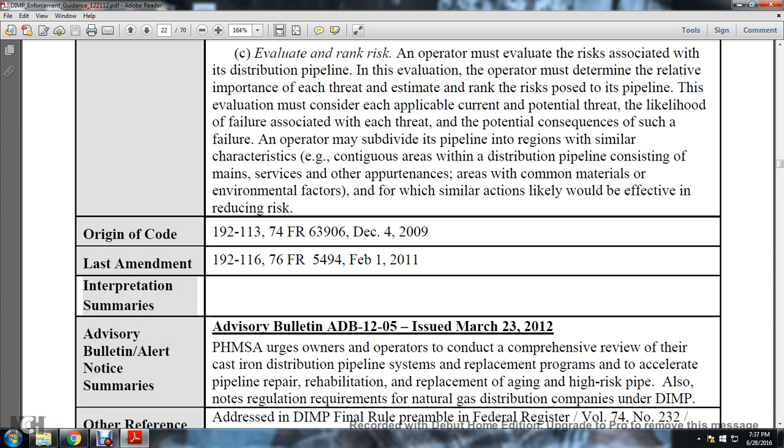Distribution Integrity Management frequently asked questions: C4C1, what are the key things the operator should focus on when developing effective risk assessment management? C4C2, from which data is the operator required to collect data for the plan? C4C3, how are newly identified threats to system integrity expected to be handled in an operator's distribution integrity management program plan? C4C6, do multiple threats need to be considered for each facility grouping?

Do all threats need to receive a related risk ranking? C4C6, what is expected of the multi-state operator regarding risk ranking? C4C7, if performing risk ranking by state, regardless of the outcome of the risk ranking, will not decrease the historical level of expenditure of each state. However, system-wide risk ranking will be used to determine where expenditure beyond historical levels will be allocated. Does that meet the intent of state-by-state risk ranking?

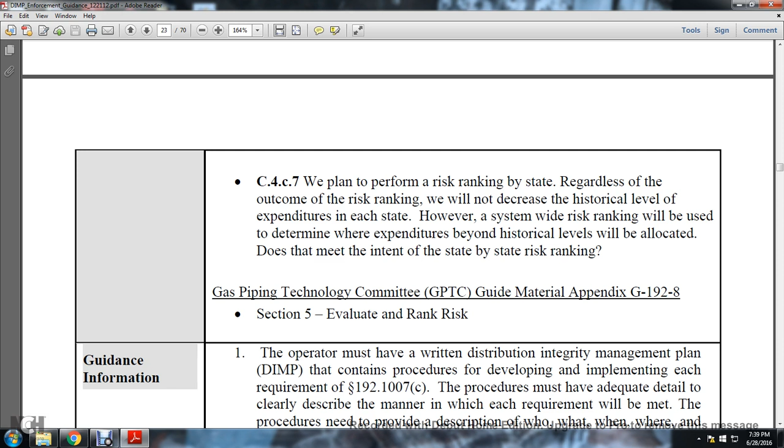The Gas Piping Technology Committee, GPTC Guide Material, Appendix G-192-8, Section 5, Evaluating and Ranking Risk.

Guidance information: the operator must have a written distribution integrity management plan that contains procedures for developing and implementing each element of statute 192.1007C. The procedure must have adequate detail to clearly describe the manner in which the requirement will be met. The procedure will need to provide a description of who, what, when, where, and how the operator will implement the elements.

The operator must follow the distribution integrity management plan procedures, and individual procedure documents should include management approvals, origin dates, and the effective date of the last revision. For additional information, see the guidance in section statute 192.1005.

Once the threat has been identified, the operator may develop a method to assess the priorities associated with risk, in order to address those of the greatest concern first.

In performing the risk assessment, it is important to note that risk is the likelihood of the event occurring times the consequence of the event. An event that is highly likely and also has high public safety consequences constitutes an event of the greatest concern.

An unlikely event having minimal consequences may not justify extraordinary precaution, while an unlikely event that could have a very high consequence may justify additional precautions. Distribution incidents are often events of low likelihood but higher consequence.

Based on the analysis, the operator may consider additional segmentation of the distribution system in order to focus on certain portions of the system for risk evaluation and risk management. actions. Segments exhibiting similar attributes and operational maintenance history should be grouped together with the application of measures to reduce risk.

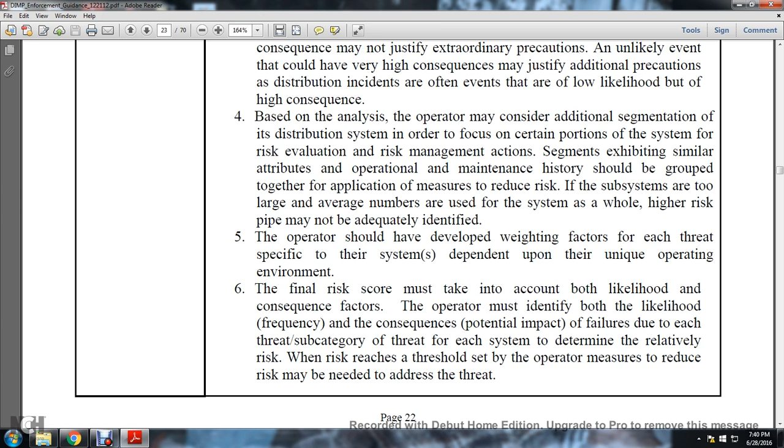The operator must identify both the likelihood, frequency, and potential impact of failures due to each threat subcategory. For each of these, determine the relative risk, and where the risk reaches the threshold set by the operator, measures to reduce the risk may be needed to address the threat.

Examples of likelihood factors, one through four: leaks per mile, maintaining leaks per mile of the main and material of the pipe; leaks per unit of service based on size of the operator; amount of construction activity in the area; and number of hits per unit and locate tickets.

Examples of consequence factors, one through six: operating pressure; population density, downtown versus rural; impact of lost supply; number of customers affected; proximity of structures to critical facilities such as schools and hospitals; and proximity to groups of people with limited mobility, usually institutionalized.

Seven, characterizing the distribution system by logical unit or facility process for prioritizing risk and subdivision is warranted. The distribution system should be divided into a sufficient number of distribution segments in order to effectively assess the threats to the system.

The operator can manage risk by addressing significant threats to specific sections, to the extent that the threat is significant and may be prevalent throughout the operator's system, or may exist only in a certain specific localized section of the system.

It is inadequate for the operator to conclude that the pipeline is not subject to a material threat based solely on the fact that it has not experienced a pipeline failure attributed to that threat. The operator must also consider potential threats.

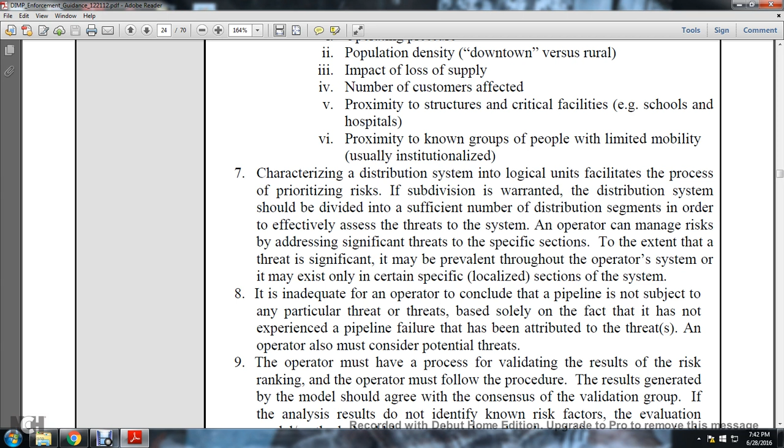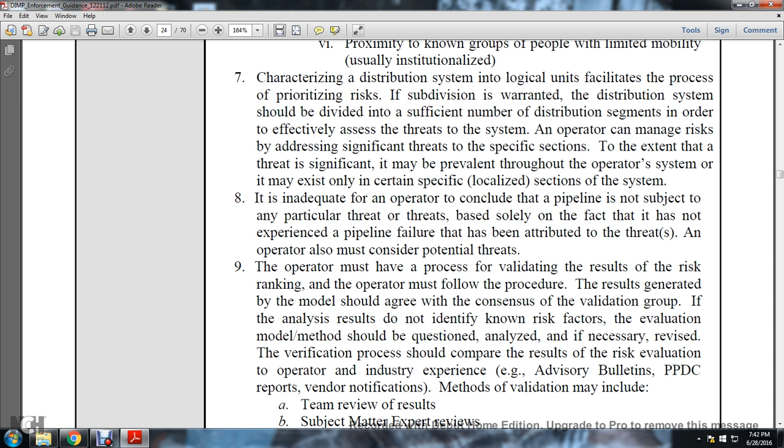The verification process should compare the results of the risk evaluation to operator industry experience, advisory bulletins, and PPDC reports. Vendor notification methods of validation include: A, a team review of the results; B, subject matter expert reviews.

Examples of probable violations: the operator does not have a procedure to cover the task required, or the operator has not followed the written procedure; the operator has not conducted the risk assessment; the comprehensive risk analysis was not adequately developed.

All portions of the pipeline were not included in the risk analysis. The process did not adequately consider risk factors unique to the operator's system when using the standard risk model.

Seven, the risk analysis process was not adequately documented. Eight, the risk analysis process did not adequately consider all risk factors. Nine, risk weighting factors were not adequately validated or justified.

Ten, likelihood and consequences of pipeline failures were not adequately considered within the risk analysis. Eleven, explicit guidelines and process formality were not provided in support of the use of subject matter experts in the risk analysis.

12. Operator specific failure history: the operating experience were not adequately considered in the risk analysis. 13. Field input was not adequately incorporated with the risk analysis.

14. General or default values were inappropriately used when data had not been collected. 15. Poor quality data were used in the risk analysis.

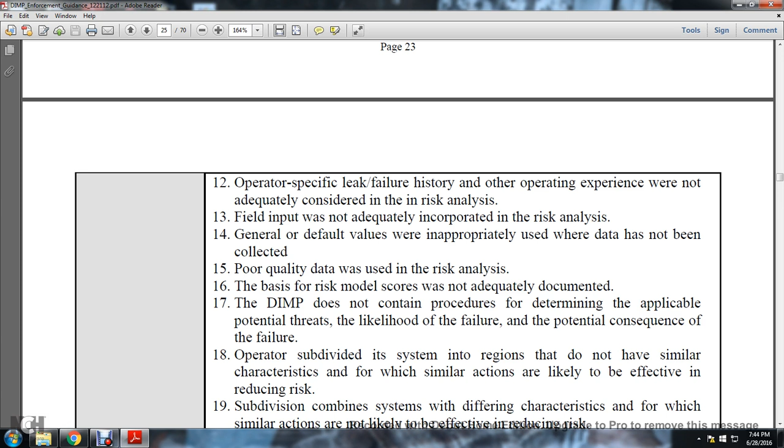16. Basis for risk model scores was not adequately documented with the distribution integrity management plan, and does not contain procedures for determining applicable potential threats and likelihood of the failure, and potential consequences of the failure. 18. The operator subdivided system regions that do not have similar characteristics in which similar actions are likely to be effective in reducing a risk.

19. Subdivision combines systems with differing characteristics for which similar actions are not likely to be effective in reducing risk. 20. Subdivision operating as a system based on a sole geographic location, not on system characteristics.

21. The analysis result did not adequately identify the dominant risk factors. 22. The risk analysis result was not adequately aggregated, such that segments of specific risk measurement were obscured. 23. The impacts of uncertainties of the result were not adequately considered.

24. The risk assessment does not prioritize pipeline segments. 25. The process of the operator described in the procedure is not sufficiently documented, so the inspector cannot make a reasonable determination as to the accuracy and thoroughness of the process. Procedures do not contain adequate detail or clarity to allow clear understanding of the process.

27. The risk calculation does not consider the likelihood and consequences of the current and potential threats. 28. The risk calculation does not determine the relative importance of the threat. 29. The operator did not validate the result of the risk evaluation. 30. The selection process of subject matter experts were flawed.

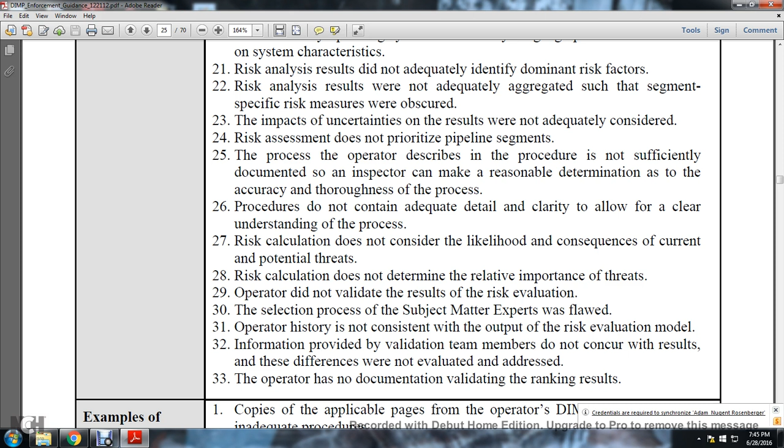31. Operator history is not consistent with the output of the risk evaluation model. 32. The information provided with the validation team did not concur with the results, and their differences were not evaluated and addressed. 33. The operator has no documentation validating the ranking results.

5. The documented oral or written statements of the operator personnel. Other special notifications are not applicable.

Distribution Integrity Management, Part 192, December 21st, 2012, 192.1007(d): what are the required elements of the Integrity Management Program? Existing code and language: a written Integrity Management Program must contain procedures for developing and implementing the following elements: identifying and implementing procedures to address the risk, and determining implementation measures designed to reduce the risk from the failure of the gas distribution pipeline.

The measures must include an effective leak management program, unless all leaks are repaired when found. Origin of code: 192-113, 74 FR 63906, December 4th, 2009. Last amended 192-116, FR 76 5494, February 1st, 2011.

Interpretation summaries are not applicable. Advisory items are not foreseen. Advisory bulletin, alert notice, and summaries. Advisory Bulletin 01-02, issued October 4, 2000: emergency plan procedure for responding to multiple gas leaks and migration of gas into buildings.

Advisory Bulletin 1008, issued November 3rd, 2010: pipeline safety emergency preparedness communication. Advisory Bulletin 9904, issued August 23rd, 1999.

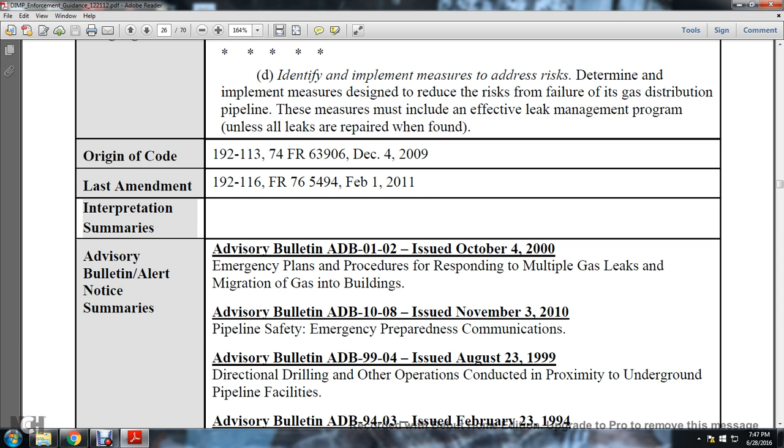Directional drilling and other operations conducted in proximity to underground pipeline facilities. Advisory Bulletin 9403, issued February 23rd, 1994: pipeline in a common right-of-way, parallel right-of-way, or crossing of a rail right-of-way. Advisory Bulletin 9402, issued January 1994: valve location and spacing.

Advisory Bulletin 9303, July 29, 1993: advisory to owners and operators of hazardous liquid and natural gas pipeline facilities in areas of flooding. Alert notice.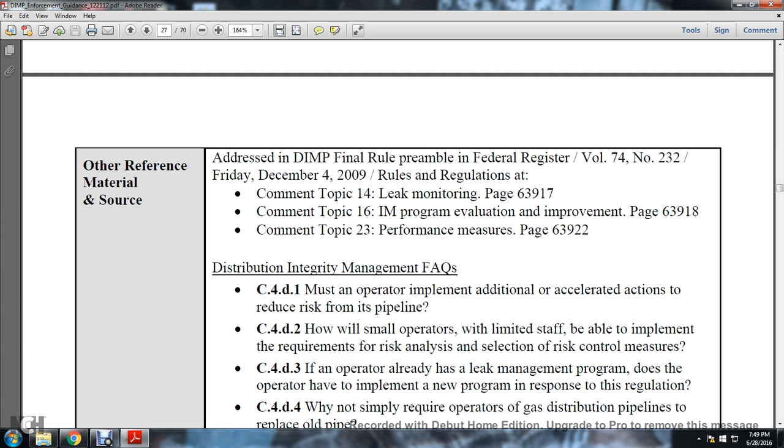Distribution Integrity Management, frequently asked questions. C4D1: must the operator implement additional accelerated actions to reduce the risk from its pipeline? C4D2: how will the small operator with limited staff be able to implement the requirements of risk analysis, selection, and risk control measures? C4D3: if the operator already has a leakage management program, does the operator have to implement a new program in response to the regulation? C4D4: why not simply require operators of gas distribution pipelines to replace the old pipe?

C4D5: What kind of issues should the operator focus on when addressing the threat of excavation damage as part of the Distribution Integrity Management Program?

C4D6: In order to eliminate the need for the leakage management program, how quickly would the operator need to repair all leaks?

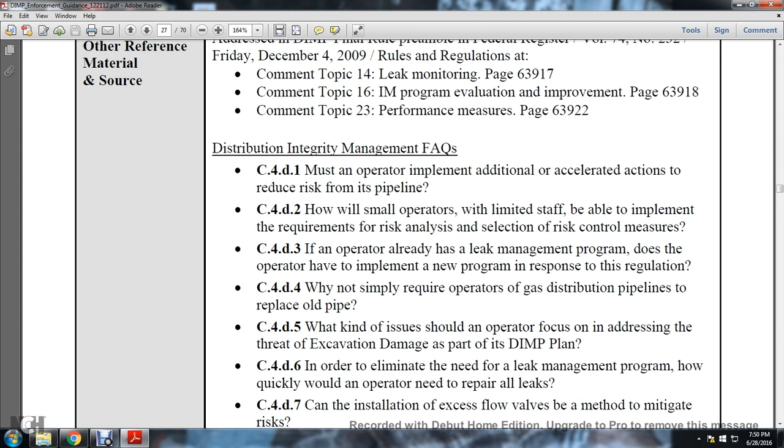C4D7: Can the installation of excess flow valves be a method to mitigate the risk, and what criteria should an operator use to identify the measures needed to reduce the risk?

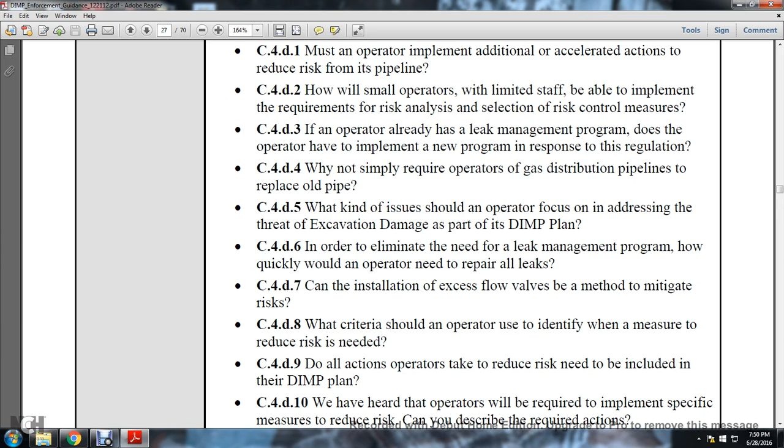C4D9: Do all the actions the operator takes to reduce risk need to be included in the Distribution Integrity Management Program?

C4D10: We have heard operators are required to implement specific measures to reduce the risk. Can you describe the required action? C4D11: How can an operator demonstrate the leak management program is effective?

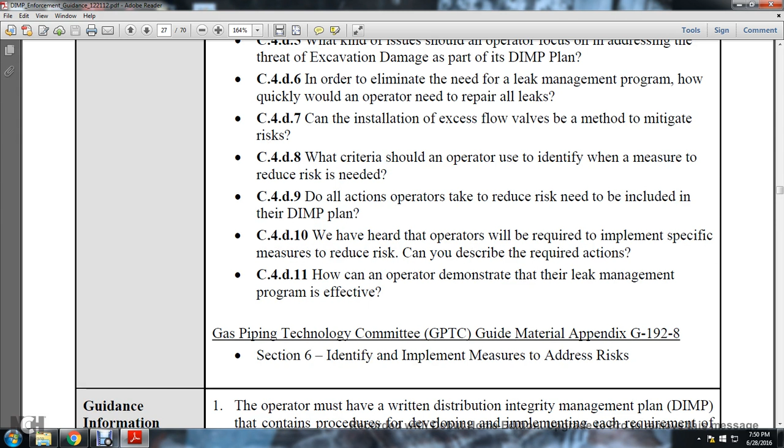The Gas Piping Technology Committee's Guide Material Appendix G-192-8, Section 6, addresses identifying and implementing measures to address risk. General guidance: the operator must have a written distribution integrity management plan that contains procedures for developing and implementing each of the requirements in Section 192.1007(d).

The procedure must adequately and clearly describe the manner in which each requirement will be met. It needs to provide description of who, what, when, where, and how the operator will implement the elements, and the operator must follow the procedures of the Distribution Integrity Management Program and individual procedures. Documentation should include management approval, origin date, and effective date of the last revision. For additional information, see the guidance of Section 192.1005.

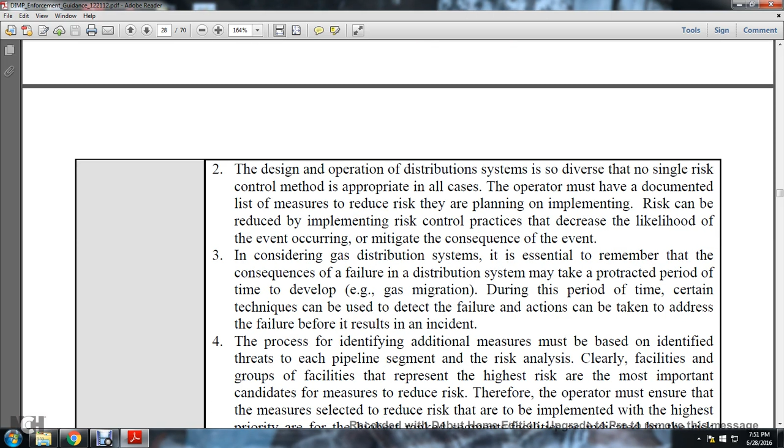Point 2: Design and operation of a distribution system are diverse, with no single risk control method appropriate in all cases. The operator must have a documented list of measures to reduce the risk they are planning for. The implemented risk control practices can decrease the likelihood of an event occurring or mitigate the consequences of the event.

Point 3: In considering gas distribution, it is essential to remember that the consequence of a failure in the distribution system may take a protracted period of time to develop into a gas migration. During that period, certain techniques can be used to detect the failure, and actions can be taken to address it before it results in an incident.

For the process of identifying additional measures, threats must be identified for each pipeline segment through risk analysis. Clearly, the facilities or group of facilities representing the highest risk are the most important candidates for measures to reduce risk. Therefore, operators must ensure the selected measures to reduce risk are implemented with priority given to the highest risk-ranked segments and facilities as indicated by the risk analysis.

Point 5: Operators are required to implement scheduled measures to address the threats and risks identified through the risk evaluation, as of August 2nd, 2011. This is an ongoing process, and one of revision as appropriate is expected.

Some measures can be implemented immediately. Others, such as pipeline replacement, may require budget approval. Appropriate allocation of resources should be considered, and major measures should be scheduled as appropriate within the distribution integrity management plan.

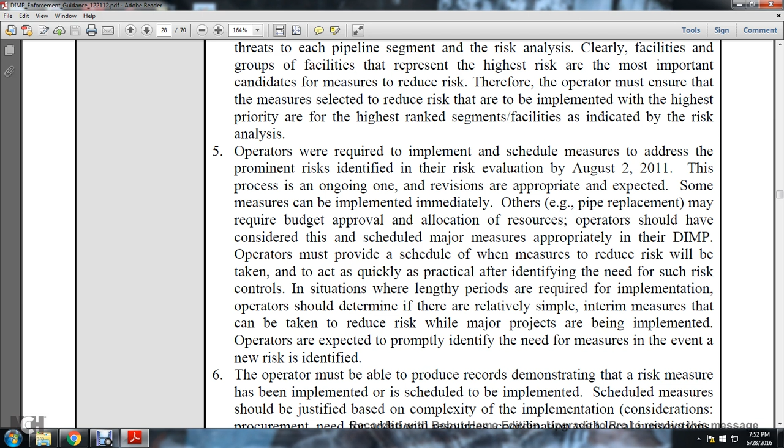Operators must provide a schedule for when measures to reduce risk will be taken, as quickly as practical after identifying the need for such action. In situations where a lengthy period is required for implementation, operators should determine relatively simple interim measures that can be taken to reduce risk while major projects are being implemented. The operator is expected to promptly identify the need for measures in the event of new risks.

Point 6: The operator must be able to produce records demonstrating the risk measures implemented and the schedule for implementation. The scheduled measures should be justified based on complexity of implementation, consideration of the need for additional resources, local jurisdiction, and qualified personnel, etc.

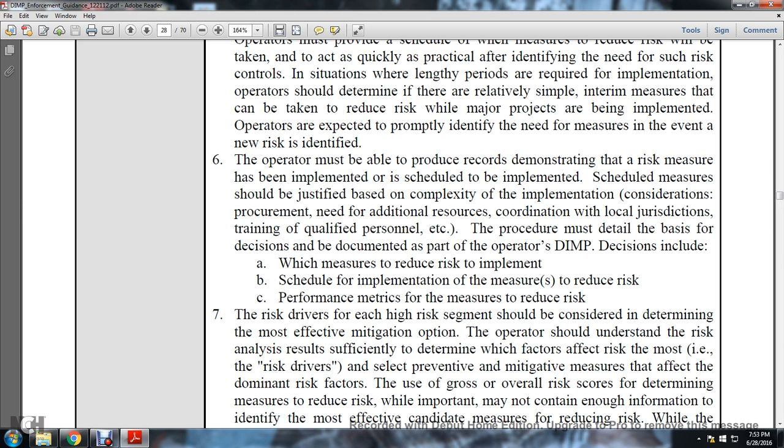The procedure must be detailed, with the basis for the decision documented as part of the operator's distribution integrity management plan. The decision includes which measures to reduce risk, the implementation schedule for those measures, and the performance metrics of the measures to reduce risk.

Point 7: The risk driver of each high-risk segment should be considered when determining the most effective mitigation option. The operator should understand the risk analysis results sufficiently to determine the factors that affect risk and the amount each risk driver contributes.

The selected preventive and mitigative measures should affect the dominating risk factors that contribute most to the overall risk. Determining the measures to reduce risk may not contain enough information to identify the most effective candidate measures.

While the evaluation may or may not result in any action being implemented, it is important that the operator's progress be prioritized based on the risk proportions of the pipeline.

Leakage data must be evaluated to identify trends of the leak and the attributes of the pipe. The leak management program is effective when hazardous leaks are repaired promptly, and all other leaks are graded, scheduled, repaired, and monitored.

The leak management system must provide for a recheck of the leak repair after it is repaired, before the leak is cleared. Repair when found means that all leaks with a hazard are treated properly.

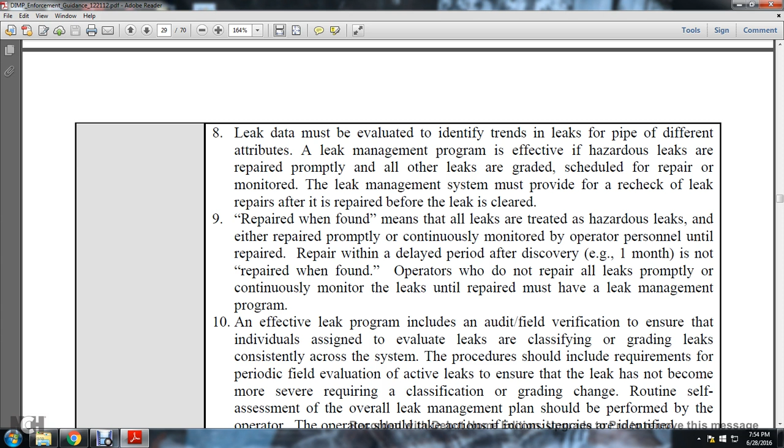Leaks continuously monitored by operator personnel, with repair delayed beyond the discovery period, e.g. one month, are not considered repaired when found. Operators who do not repair all leaks promptly or continuously monitor them until repair must have a leak management program.

An effective leakage program includes audited field verification to ensure the individuals assigned to evaluate leaks are classifying and grading them consistently across the system. The procedure shall include requirements for periodic field evaluation of active leaks to ensure a leak has not become more severe, requiring reclassification or regrading.

A routine self-assessment of the overall leakage management program should be performed by the operator. The operator shall take action if inconsistencies are identified.

Examples of probable violations: the operator does not have a procedure to cover the task required; the operator fails to follow the written procedure; the comprehensive risk analysis process was not adequately implemented.

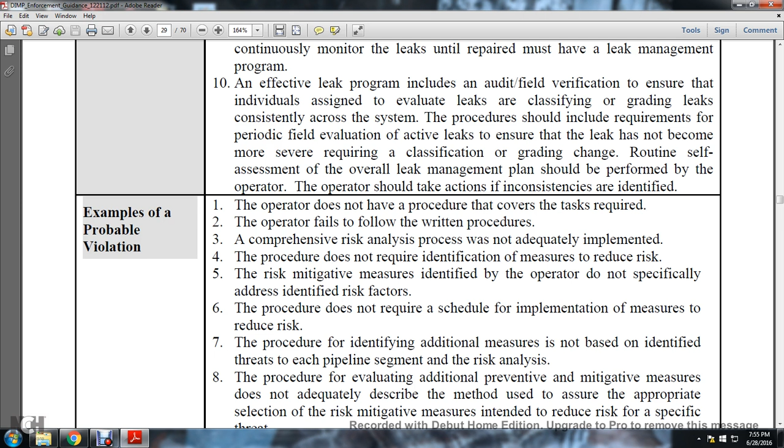The procedure does not require identification of measures to reduce risk. The risk mitigative measures identified by the operator do not specifically address the risk factors. The procedure does not require scheduled implementation of measures to reduce risk.

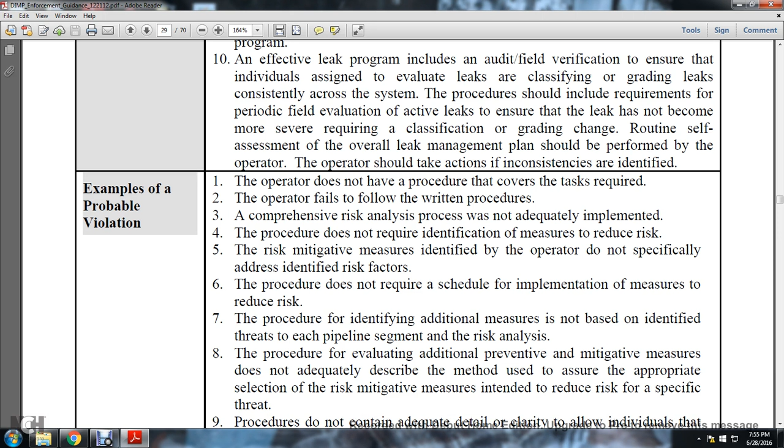The procedure's identified additional measures are not based on identified threats for each pipeline segment's risk analysis. The procedure for evaluation and additional preventive and mitigative measures does not adequately describe the method used to appropriately select risk mitigative measures intended to reduce the risk of a specific threat.

The procedure does not contain adequate detail and clarity to allow individuals not previously involved in the process to perform the task. The process does not adequately require documented justification for decisions regarding additional preventive and mitigative measures.

The distribution integrity management plan does not provide a process to implement mitigative measures. The scheduled implementation of mitigative measures is not provided, and measures to reduce risk have not moved forward according to the operator's procedure. Operators do not identify measures to reduce risk when required by the risk evaluation.

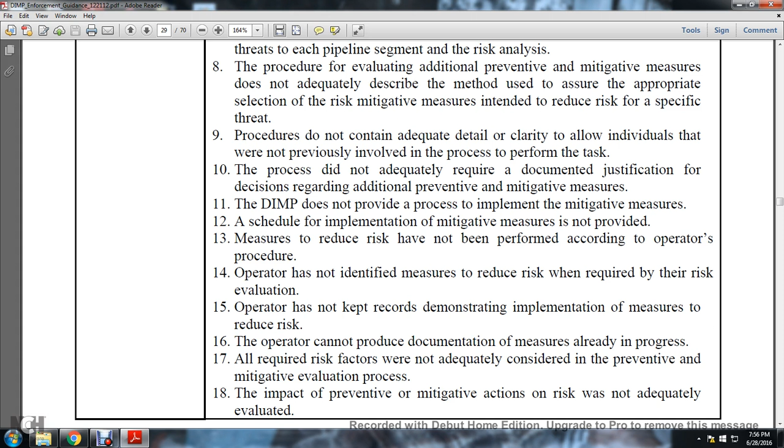The operator has not kept records demonstrating implementation of measures to reduce risk. The operator cannot produce documentation of measures already in progress. Records show that factors were not adequately considered in the preventive and mitigative evaluation process.

The impact of preventive and mitigative actions on risk was not adequately evaluated. Risk mitigative measures housed in other programs were either not included or not referenced in the distribution integrity management program. Leaks graded as non-hazardous are becoming hazardous before repair, and the operator has not self-assessed or made appropriate adjustments to the leak management program.

The operator is not rechecking leaks within the scheduled time period. The operator has not evaluated the leak program to determine if it is effective. The operator has not ensured consistency of leak grading across the system.

The procedure is not sufficiently documented to allow the inspector to make a reasonable determination of accuracy and thoroughness of the process. The procedure does not contain sufficient detail and clarity to allow anyone using it to perform the task.

The leak management program was either not included or not referenced in the distribution integrity management program, or it is not applicable since the operator repairs all leaks found.

Examples of evidence include copies of the applicable pages of the operator's distribution integrity management program demonstrating inadequate procedures.

Other evidence includes copies of risk evaluations demonstrating measures to reduce risk needed but not on schedule; records indicating the operator is not making progress implementing risk reduction measures; records indicating the operator is not adequately following the leak management program; and records showing monitoring deadlines are not met and repairs exceed deadlines.

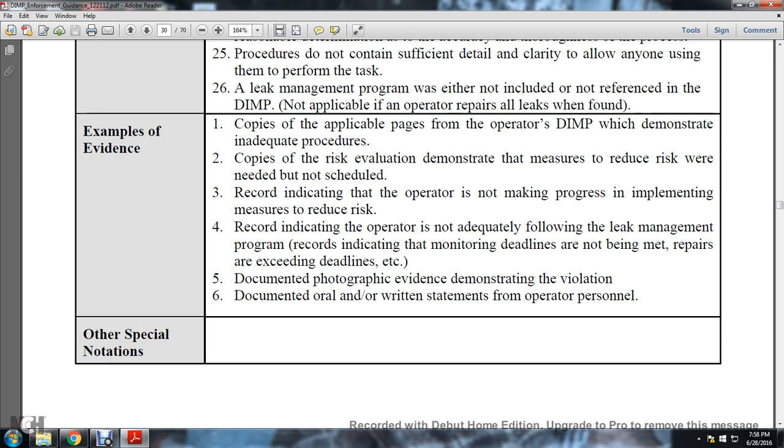Documented photographic evidence demonstrates the violation, as well as documented oral or written statements by operator personnel and other special notations not otherwise noted.